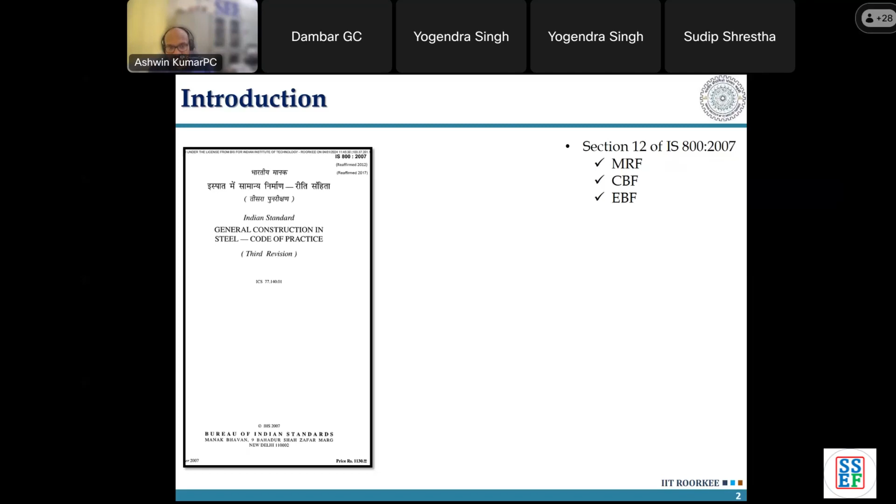In terms of IS 800, with respect to design of steel structures, you may already be aware that we have been using IS 800 2007 for a long time. In section 12 of IS 800 2007, there are 3 systems mentioned that we can use in steel structures: moment resisting frame, concentrically braced frames, and eccentrically braced frames. There is a new code released last year, IS 18168.

This code is titled Earthquake Resistant Design and Detailing of Steel Buildings, Code of Practice, which again includes SMRF, SCBF, and EBF. You might notice a small difference from section 12, wherein MRF includes ordinary moment resisting frame as well as special moment resisting frame. In IS 18168, the names are SMRF and SCBF, special moment resisting frame and special concentrically braced frames.

This means this particular code, released last year, was only focused upon high seismic zones, meaning these three structural systems, if used in high seismic regions, what codal guidelines need to be followed for the design of steel structures.

So my aim today is to make you understand the code clauses, how to design a particular structure, so that based on whatever information you have gained, you can do a vulnerability assessment, and if the performance is poor, go for a performance-based design. So the idea is to understand the current design guidelines for these three systems, SMRF, SCBF, and EBF, covering today the special moment resisting frames in totality.

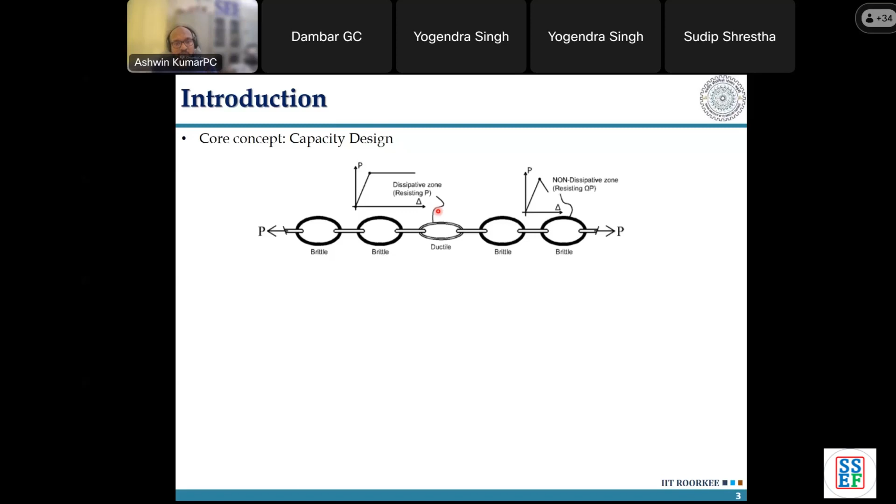The area under the nonlinear curve is what we call energy dissipation, needed during an earthquake. If you're looking at a moment frame, we need to identify which element should be more ductile and which can be less ductile and stronger, such that maximum energy dissipation happens in the beam. There must be a hierarchy in performance, so maximum energy dissipation happens in the member whose damage or fracture does not hamper the gravity load carrying capacity of the system.

So we have three systems: SMRF, SCBF, and EBF. In an SMRF system, we identify which is the ductile or weak member to go for. Rather than saying brittle, we call it the deformation controlled element, shown here, and the brittle element is called the force controlled element.

Now consider an inelastic deformation, or plastic hinges being formed, which means extreme fibers get yielded, and the yielding moves from the exterior fiber until the whole section is yielded, where the plastic hinge forms. Through that we want to dissipate energy, and that hinge has to have adequate ductility or rotational capacity to allow deformation in the member.

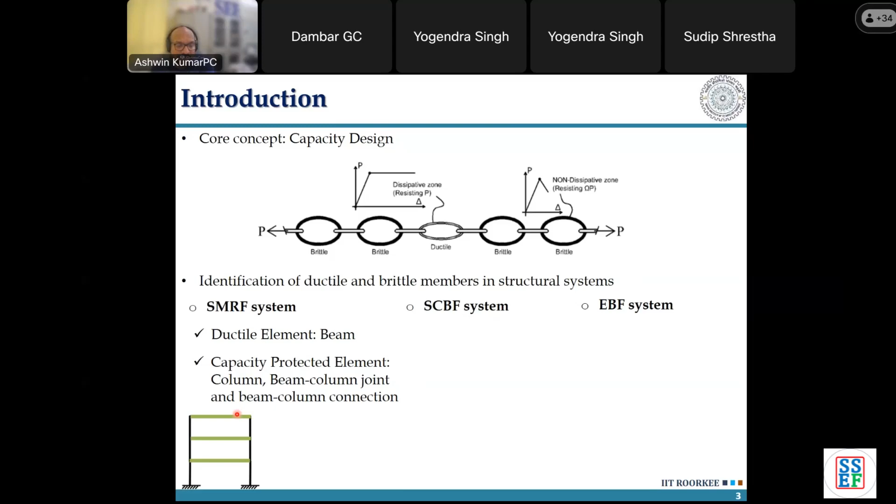You must have understood that if nonlinear hinges or yielding form in the column, it means the column will get damaged, which can lead to collapse of the member. Whereas localized plastic hinges at the beam are not as problematic, as we learned earlier.

In an SCBF system, which we'll learn next week, the ductile member or deformation controlled element is the braces, which undergo yielding and buckling under compression and yielding under tension, dissipating energy. Whereas the force controlled elements are the beams and columns.

It's like an electric fuse in your house - whenever voltage increases, the fuse element blows off, safeguarding all your electrical equipment. The same way, if the braces get damaged through yielding or buckling, they dissipate energy during the earthquake, safeguarding the beam column element.

So the deformation controlled element in the CBF system is the braces, and the beams and columns are the force controlled elements. Now, regarding eccentrically braced frames, this is intermediate to a moment frame and a braced frame, where you can see a slight eccentricity in the center line of the braces. There is a small link element, which we'll cover next week.

This link element is the energy dissipating element, meaning the brace, which was supposed to yield and buckle in a CBF system, is supposed to remain elastic throughout the performance of the EBF system. Instead, the whole energy dissipation, either through flexural hinges or shear hinges, is formed in this small location, termed the link element.

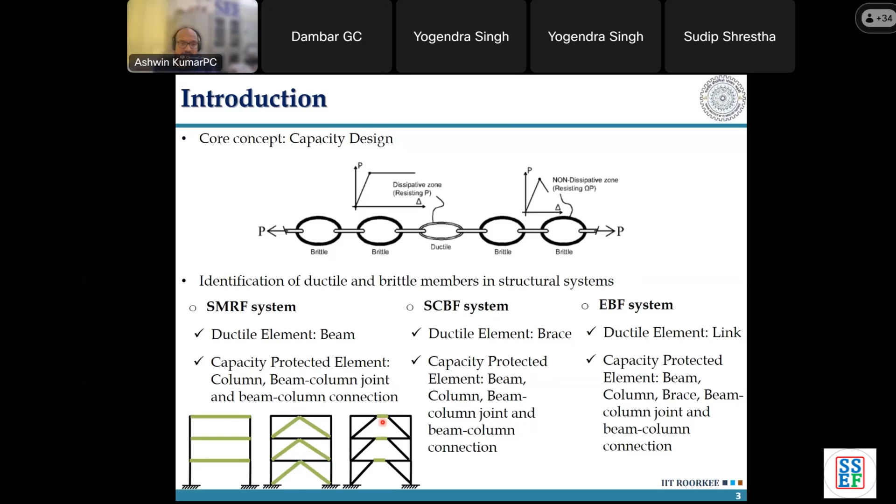Your design, whatever you are learning as per IS 800 2007 with respect to designing beams and columns as per limit state method, does not change. It is only a hierarchy that is being brought through the capacity based design method, through which we allow a certain duty to certain elements and give another duty to force controlled elements. That is the whole difference between what 18168 brings to the table.

Now, the first thing we have to understand with respect to 18168 is, if I start a design with respect to a moment resisting frame, CBF, or EBF system, what material grade should I select for the design? As per 18168, if you download that code, it crystal clear makes you understand that the sections, whether rolled steel sections or plates, can be of grades E250, 275, 300, and E350. Earlier I have a slide showing what the previous IS 800 used to give. So currently, as per the new code, you can use grades up to E350.

Another clause in the same code says that if any other steel is being used other than E250, 275, 300, or 350, you have to ensure that the nominal yield stress should not be greater than 350. So currently, the code in a high seismic region does not allow you to use more than 350 grade of steel.

The second thing is that any other class of steel, not per se of the grades mentioned above, if used, should have a minimum elongation of 22%, which means you do a coupon test as per IS 1608 or ASTM E8. You mark the gauge length location, and then once the fracture has happened, you measure the change in length to the original length of that gauge length location. That percentage elongation should be more than 22%.

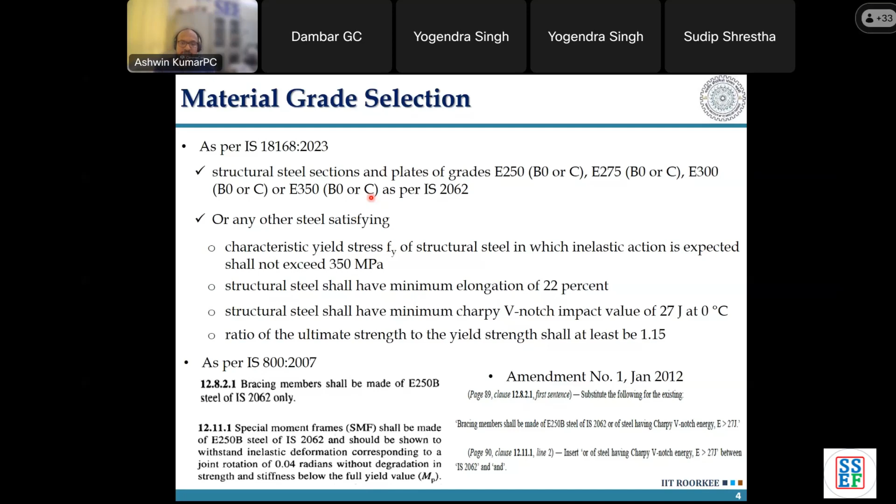So you can understand that E350, as I earlier said, IS 18168 is only for high seismic region. Whatever grade or structure mentioned for high seismic region can also be used in a low seismic region, because the demands in high seismic region are very high. The performance of these systems is much better than what is required for low seismic region classification. So you can use these grades there too. The big takeaway from this slide is that we can go up to E350.

Now this is a new entry into IS 18168. We understood that capacity design is the main heart and soul of IS 18168. If capacity design is there, we have to identify the weakest member, and based on the maximum force that the weakest member can transfer to the brittle or force controlled member, they should be designed accordingly. So IS 18168 has introduced a factor known as material uncertainty factor.

There are two factors given. One is Ry, which is the expected yield stress to the characteristic yield stress, which is what you test. Like if I give you a plate of E350 grade, 16 mm thickness, and tell you to do a coupon test to find the yield strength as well as the ultimate strength you are achieving.

So Ry is the value of the yield strength you get from the coupon test divided by the nominal value. If you use a nominal grade of 350 MPa and test it under coupon test, you believe 350 is the minimum yield strength mentioned by the code. So obviously the material would have a higher strength, let's say 400. When you test it, you get a yield strength of 400 MPa whereas the nominal value is 350 MPa. So 400 by 350 is the value of Ry.

Whereas Ru is the same ratio with respect to ultimate strength. So whatever expected value of ultimate strength divided by the nominal strength mentioned by the code for that particular grade. The relevance is very important here.

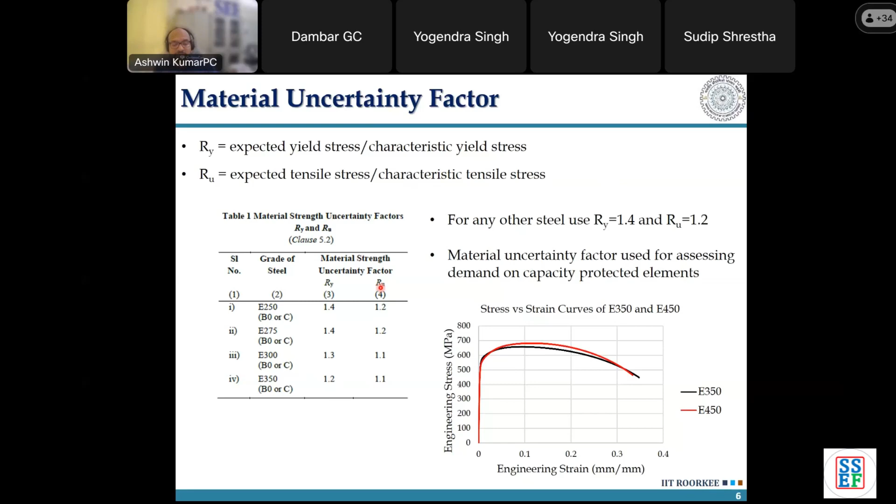So the catch here is, as soon as we go to high strength steel, ductility decreases, so other problems come in. That is why the code does not recommend anything beyond E350. But if you look only at the material uncertainty factor, E450, if it had enough ductility, would be an ideal choice, because the material does not have uncertainty over its yield strength or ultimate strength.

That is where capacity design comes in. So if you understand, let's say I have an E250 beam connected to an E250 column. The beam section might be different, the column section might be another section, and the heat input while manufacturing, or the rolling process or cooling process of these two beams, might be different.

Since this is an average value given in the code, you might find that the beam might have an RY value of 1.4 as per the code, but if you test a coupon, you might get 1.5 also. So there is a problem: if my RY value is not under control, or if I don't have a proper estimation of that particular RY value, rather than ending up with a strong column weak beam, I might end up with a weak column strong beam kind of situation.

So that is why this quantity, for the design purpose of creating a hierarchy between deformation control and force control, is important. It is also important to have total control as to when you give your orders to a manufacturer of steel. You have to ensure that, okay, you're giving me the average value given in the code, but kindly do some testing and give me a mill test report also. Let me do some testing at the lab also to ensure that 1.4 is a good number to go with or not. You understand the clarity now?

Just to summarize, the RY factor, or material uncertainty factor, is for designing the force controlled element only. It is not for the deformation controlled element. The deformation controlled element's maximum capacity we need in order to design the particular column element in a moment resisting frame, which is the force controlled element. So we have to apply this uncertainty factor while calculating that demand value from the beam so that I can design the column. That is the whole deal of the uncertainty factor.

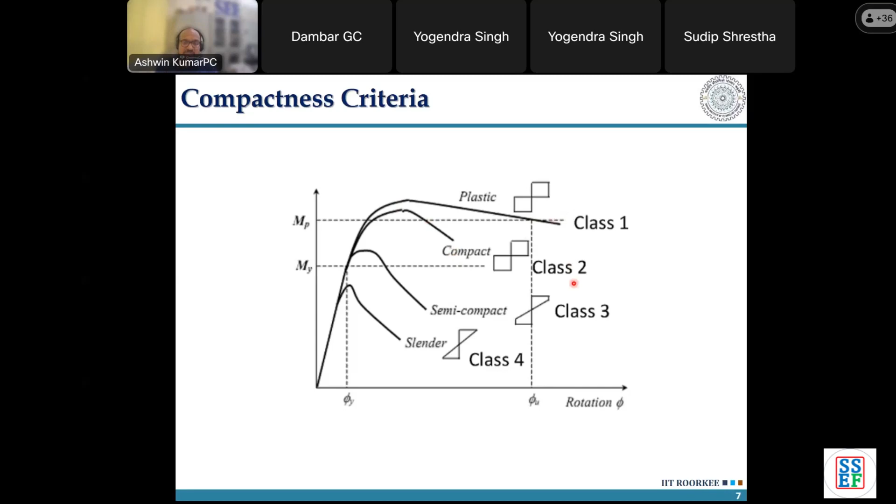But you have to understand that if you look closely at table 2 of IS 800 2007, the requirements given there for beams, columns, or built-up sections were largely for flexural members, like in a moment frame beam or column. Also, if you compare the values given there to international codes, you'll find that we were a little more relaxed about the requirement of plastic, semi-compact, or compact sections.

Just for everyone's information, if I have a beam where the flange satisfies the plastic condition but the web satisfies only the compact condition, then the section classification is compact. So if I want a plastic section in totality, then both my flanges and my web, in a beam or column, should be plastic in total. That is what is given here.

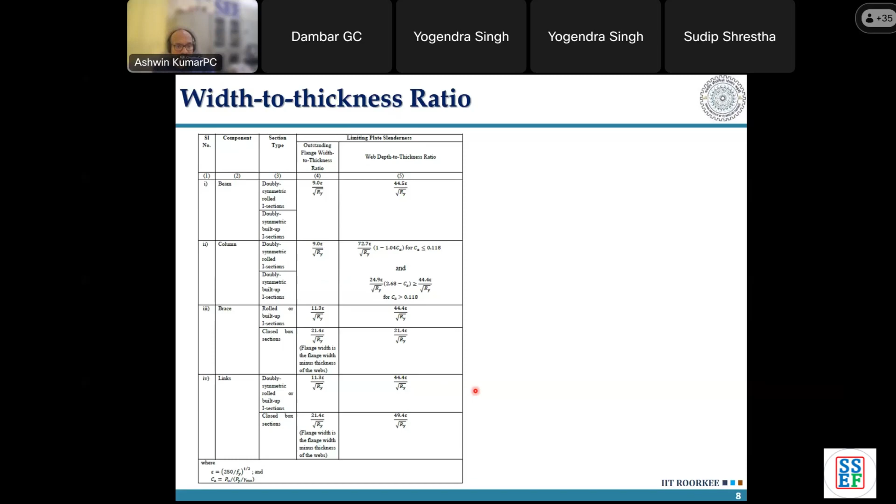As you call them, but in IS 800 or IS 18168 language, this is known as the continuity plate. We'll come to this part as to what continuity plates are - there is an entire story on this panel zone, etc.

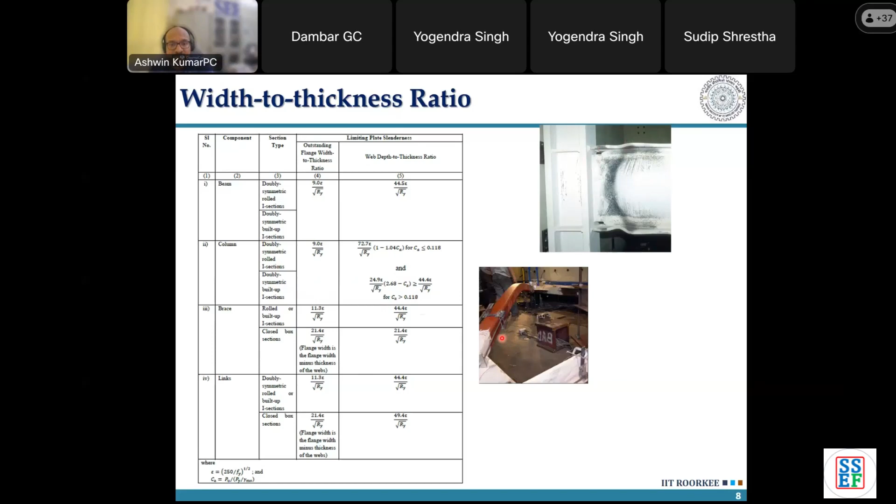You can see the phenomena of a brace frame here. The brace is buckling. Then local buckling occurs, and you can see a dip that forms in the brace when the nonlinear deformation increases. Then fracture initiation starts, and finally the fracture happens.

If you choose a brace section that is not so stout, like one with a large diameter and a very small thickness, that section, when it undergoes buckling or yielding, will undergo larger local deformation than a stout section. If a member undergoes global buckling, that's part and parcel of the life of a brace element in a concentrically braced frame. But if global buckling occurs along with a higher amount of local buckling in a brace, the brace fractures much earlier.

So when you have capacity protected elements like columns and deformation-controlled elements like beams and braces in a CBF system, you want them to have a longer life so that you can achieve ductile performance, with the weakest link having more ductility, and you don't want any premature fracture to happen. So apart from material selection, the compactness criteria has to be maintained to delay the onset of local buckling in the member.

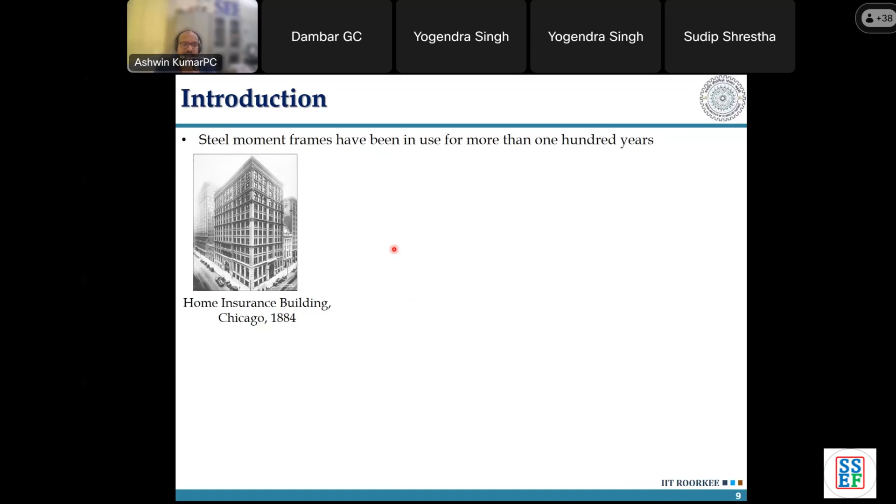You can understand that the Empire State Building, which you already know, was the first building where rolled I and H sections were used in the design.

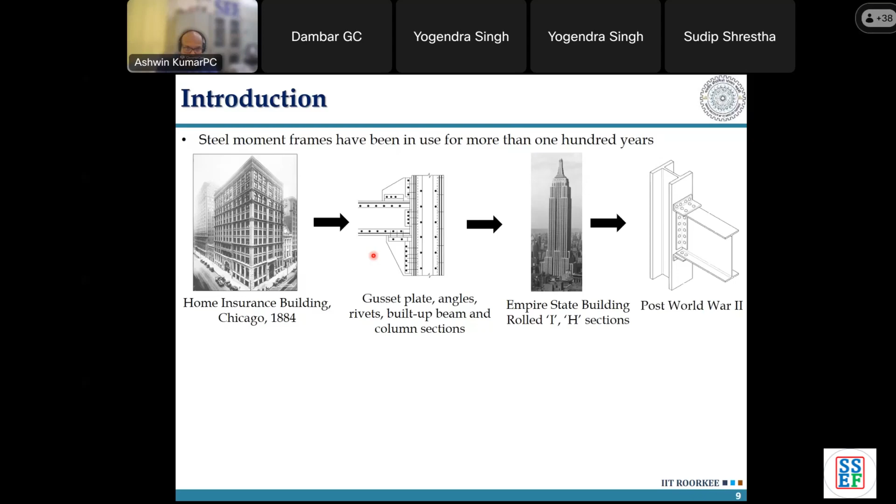Post World War II, for some reason, when they used all steel, they tried to optimize these connections into a more uniform one, which we normally see today. So you can see a 1970s welded flange, bolted web connection, which we normally see in India - when we look at beam column joints, we typically see this kind of connection where the webs are bolted and the flanges are welded.

Once again, you can see the continuity plates here, at these two locations. It's a stiffener.

So what does the property of the continuity plate do? If I have bending moment, earthquake, or gravity loads wherein this particular flange gives compression to the column flange here, if the column flange is of a larger width, it can undergo local buckling quickly. So to stiffen that particular flange of the column is why we give the continuity plate.

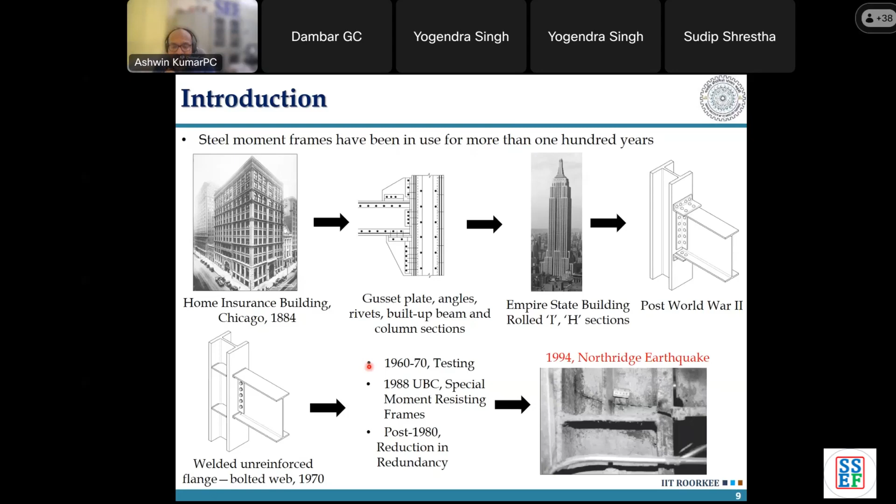You can see here a kind of typical damage observed in a steel structure in the 1994 Northridge earthquake. You have to understand that in this earthquake, none of the steel buildings collapsed, which shows how steel buildings are much superior to RCC buildings.

But to say nothing collapsed - there were certain locations of failure observed in the frame members. You can see the column flanges, the beam bottom flange shown there, the beam web, the continuity plate, and rather than a doubler plate, the shear panel in the panel zone has been stiffened using a vertical stiffener plate.

The same process - if I want to stiffen a panel zone, I can either give a doubler plate or give a stiffener, which divides the panel zone into two different areas, reducing its shear buckling length, correct? So you can see the column and beam here.

You can see the weld access hole, and you can see a crack emanating from the bottom of the weld flange directly across the column. So what happened at that time was they noticed a small thick plate below this - you have a weld access hole where people would give a complete joint penetration weld here.

So when they were doing the welding, they would give this backing plate so that the weld does not ooze out. But the earlier process was to keep this backing plate in place, thinking it would reinforce that joint area. Later on, it was understood that keeping the backing plate creates a deformity or flaw in the welded region, such that when earthquake or cyclic load is applied, this translates into a crack or failure in terms of functionality.

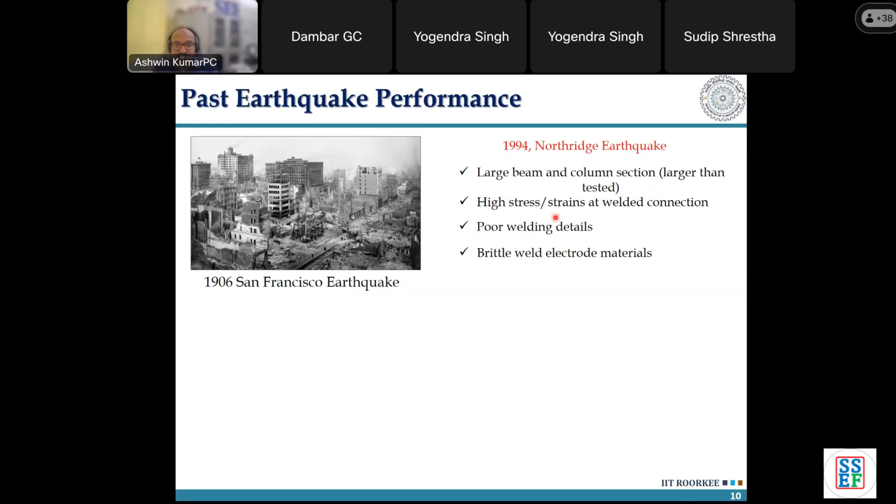And then the welding detail - you can see all the rest of the three details as to the reasons why failure happened during the 1994 Northridge earthquake was related to the welding being poor, or the conditions. Welding electrode material was not good, high stress-strain at the welded connection because of the backing plate that was there, and poor welding details were all the reasons.

But our requirement is that within the range of demand that the earthquake is going to give us - like normally if you open any FEMA code etc., it says under DBE level, the interstory drift ratio for a moment resisting frame should be below 2.5%, whereas under MCE level, the interstory drift ratio value should be less than 5%, because beyond 5% nobody can guarantee the efficiency of the connections. Beams and columns may be functional, they might not have fractured at all, but dependability on the connection reduces.

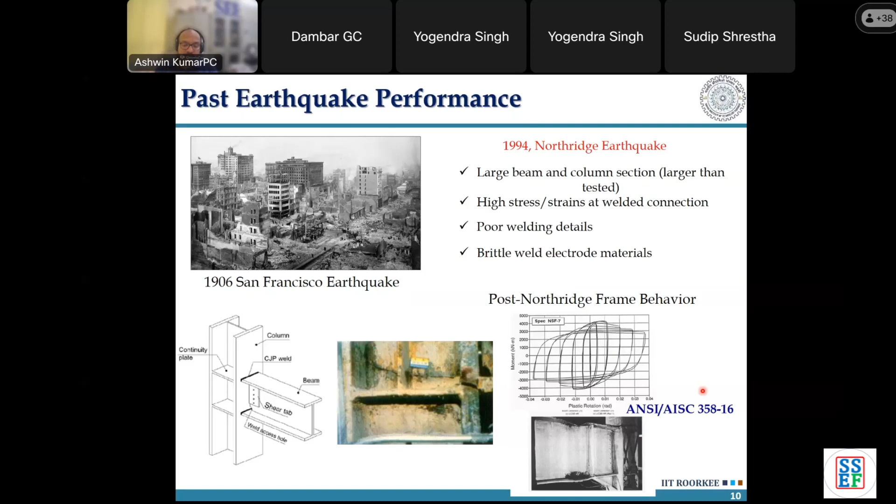So when you are testing your steel for their procedure, you have to understand, if you're using E350, your Ry value is 1.2, or if it is E250, it is 1.4. We have to take care about strong column, weak beam, not turning into a weak column, strong beam kind of condition.

So as a moment frame, what do you expect in a high seismic event? We are talking about performance-based design. We need to understand the ideal performance from the system. In a moment frame, if I get maximum hinge mechanism in the beams, then I'm dissipating more energy, which is ideal for my system. I can also be happy with plastic hinges, or yielding, at the bottom of the column. This is the ideal mechanism.

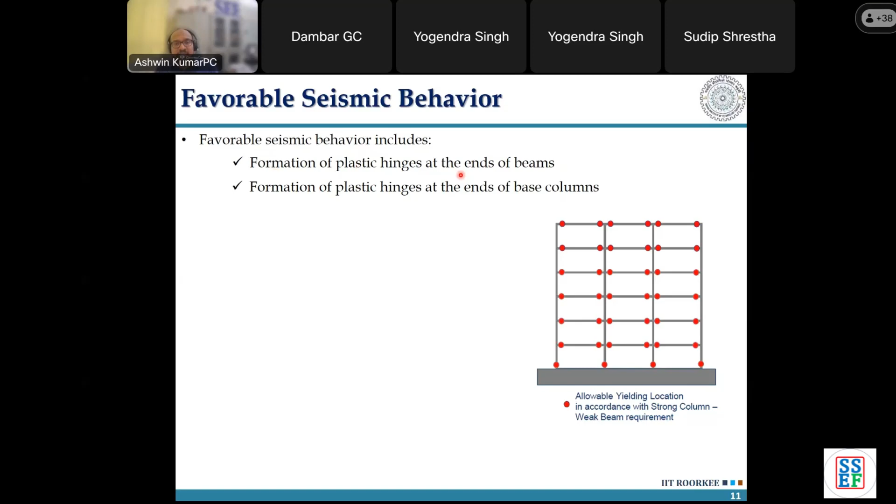If I go for only column hinges, or the column mechanism, rather than having many hinges, my hinges might be concentrated at a particular floor level, and the building can undergo collapse. So the ideal mechanism is formation of plastic hinges at the ends of the beams and formation of plastic hinges at the end of the base columns.

While this is happening, local buckling of beam and column flanges can occur. It is not unusual to find this kind of local buckling in a beam, and large deformation of the web can also happen when demand increases. This isn't under serviceability or DBE, but a condition when drift reaches a higher value, say an interstory drift ratio of 5%. Only then is such heavy deformation in flange expected.

Now, as I explained in the last slide, what is favorable behavior? Let's look at unfavorable seismic behavior. For a beam, excessive local buckling can result in strength loss and ultimate fracture associated with low cycle fatigue. You understand why I call it low cycle, or to be precise, ultra low cycle fatigue, because in an earthquake, only 10 to 20 cycles are enough to fracture the member under fatigue.

So what is the remedy if I have excessive local buckling? I have to choose a highly compact section as per Table 2 of IS 800. Also, lateral bracing, horizontal bracing given to beams or columns, is provided so that they have bracing to increase their capacity and reduce the sway action moment. So you have to give a highly compact section, not in the sense of Table 2's compact section case, but a section which achieves plastic moment capacity and has adequate rotation capacity, meaning a plastic section.

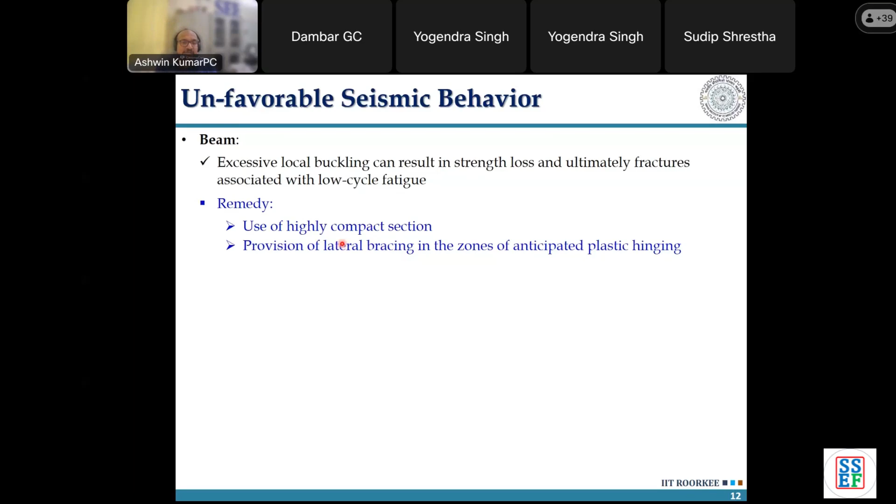Unfavorable behavior in terms of connections would be fracture in and around welds, fracture in highly strained base material, fracture at weld access hole, and net section fracture. Fracture in weld access hole is just the hole near the backing plate, which gives access for the welder to do CJP welding along the flanges. Sometimes people cut that hole to give easier access for welding the particular flange. Other issues are net section fracture of bolt holes, shear and tension failure of bolts, bolt bearing, and block shear failure. These are all names associated with connection failure.

And the remedy is to give pre-qualified connections. It's easy to understand what the remedy is there.

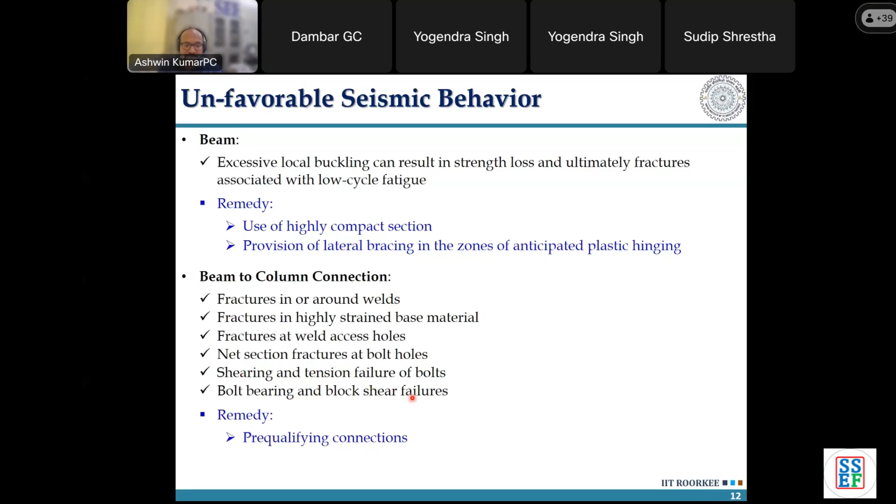In terms of joint panel zones, web compression buckling opposite the beam compression flange can happen, web shear buckling can happen, and fracture at weld in case of doubler plate connection. We will take up panel zones in a separate set of slides where I'll explain the current code requirements. But if such failure occurs, we have to meet the minimum shear strength requirement for the panel zone, and provide stiffener plates as a continuity plate, or give doubler plate requirements to increase the buckling capacity of the panel zone.

The stiffener plate, which is the continuity plate, is to give stiffening to the column flange in order that they do not undergo local buckling.

Controlling welding details is important, do not give higher heat input, because if you give higher heat input, it may reduce the yield strength and may produce residual stresses in the members.

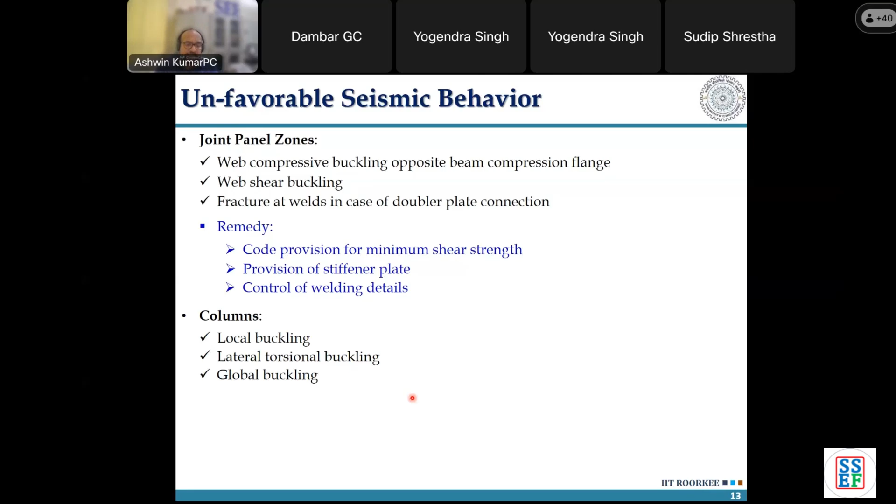In columns, local buckling can happen, meaning lateral torsional buckling, which you would have heard in a beam. In terms of columns, it is torsional buckling to be precise, and global buckling can also happen. The remedy is to give adequate axial strength, adequate compactness ratio, and lateral bracing has to be provided, as in the case of a beam.

Column splices are same as beam and column connection. For column bases, many things can happen: anchorage stretching or pull out, fracture in the base plate, fracture in column to base plate connection, and local and lateral torsion buckling at the plastic hinge. The remedy is column bases could be designed with a gusset plate or the base plate design, which we have to do perfectly.

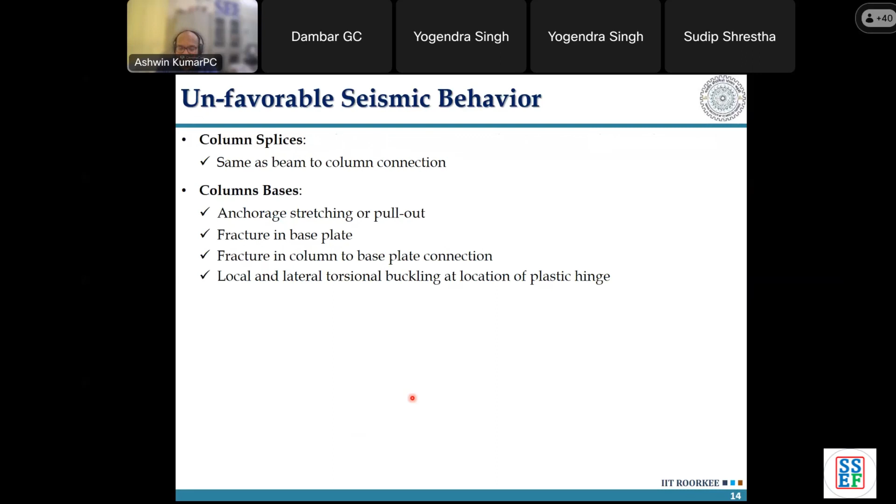Now, I don't know whether you can interact with me or not, maybe access might not be there, so I'll ask this question to you.

In terms of response reduction factor, for SMRF it is more than OMRF - will it translate into a low cost building? You understand that the response reduction factor for an SMRF would be very high compared to an OMRF. For SMRF it is 5, for OMRF it is 3. So will it translate into a low cost building or not?

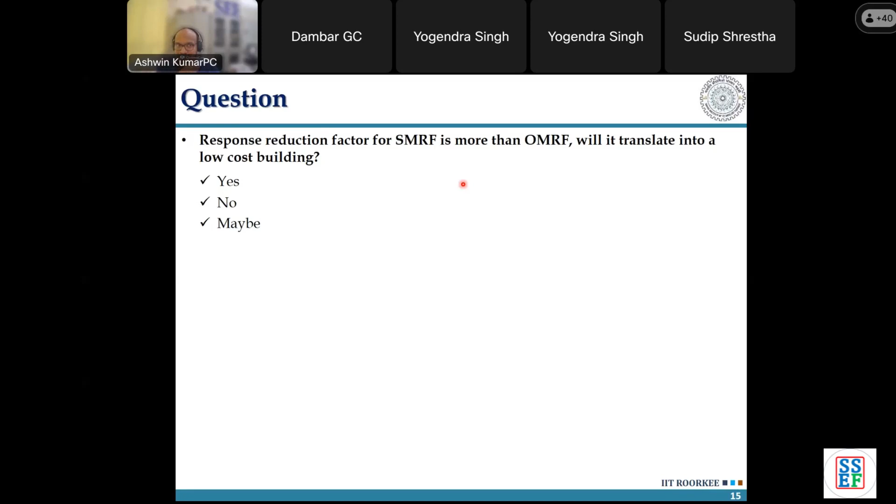You may say yes, no, maybe, but the answer is, in a moment resisting frame, normally the design is governed by the drift criteria, more than the strength criteria, because the stiffness is very low.

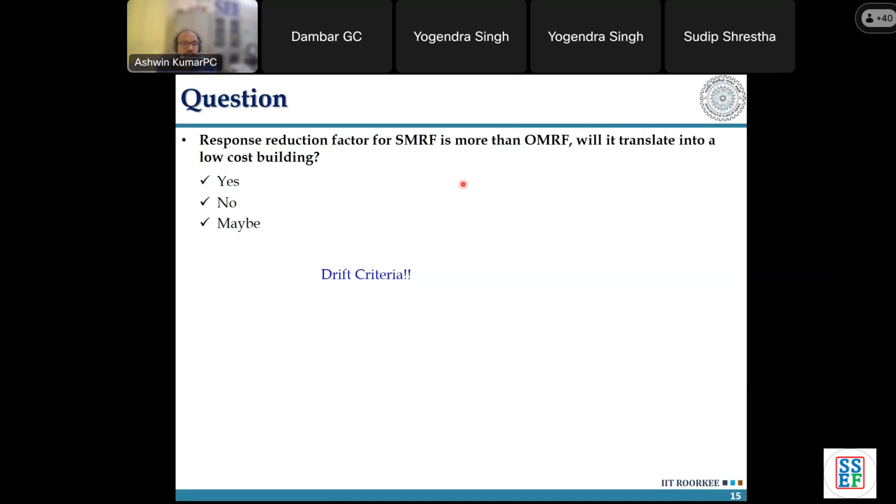You have beams and columns which provide this lateral stiffness to the member, and in comparison to a braced frame, you know that if you give braces in a diagonal fashion or in an X fashion, it is going to increase the stiffness of the structure. But you can understand that for an SMRF or an OMRF, drift would be the governing criteria in terms of your final design. So changing from SMRF to OMRF is not that important - the more important criteria would be the drift criteria.

With respect to design, what are the factors that may affect this, apart from the strength criteria? You may be using IS 800 or 1893 load combinations, like dead load plus live load plus earthquake load, where in most cases 1.5 dead load plus 1.5 live load plus 1.5 earthquake load might be governing your strength criteria. But as I mentioned, for a moment frame, it is the drift criteria that governs.

Other than that, since the drift is higher, P delta instability or second order effects might be there. Also, strong column, weak beam criteria applies.

Even if you have designed your beams and columns as per the demands that have come, the final section size selection would be based upon the strong column, weak beam criteria. So your section sizes are getting bumped up, I mean, they get increased.

Then there's the compactness limit - if it is in a high seismic region, you have to give a plastic section, so again your section sizes are going to increase to satisfy the compactness limit that is given in table 2 of IS 800. And then there are available sections.

The problem we have in India is that we have a certain code, like you must have heard about SP6, which gives the details of available sections for, let's say, angle sections, I sections, channel sections, etc. So with respect to that, you have a limited amount of sections.

So you might have always faced this issue that whenever there is a requirement for a beam and you check your section modulus requirement is so and so mm cube, and you want to select a section which is nearby to that, there is a big gap between what you want and what you have available. So that also adds up to the overall strength of the member that you're going to give.

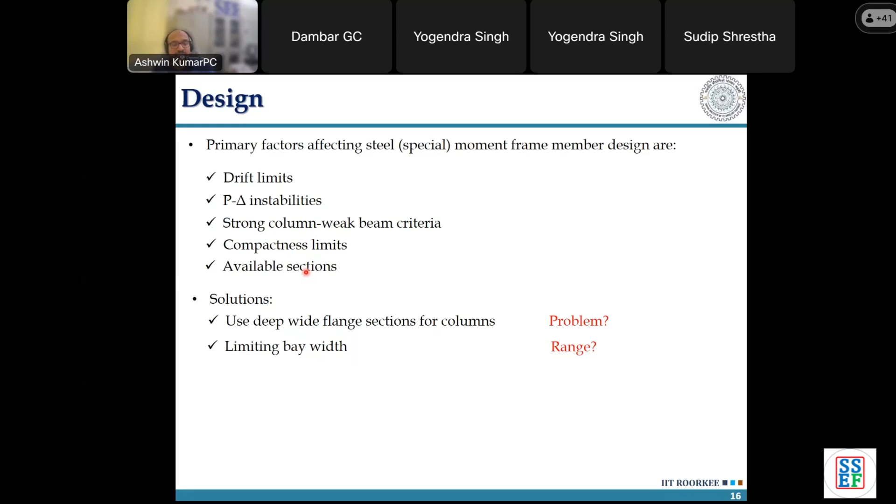A few tips: lighter, shallower sections and their connections that meet code compactness requirements tend to have larger inelastic deformation capacity than deep, heavy sections. So try to control your bay width so you don't end up with a deep section, rather go for a shallower section.

It's also desirable to distribute lateral resistance in an SMRF system to multiple bays rather than very few bays. The practice in America is to have a moment frame with multiple frames, like in RCC, to be moment resisting. But they only design the SMRF as the most peripheral moment frames, while the interior frames are only gravity resisting and made deformation compatible, but the onus of taking lateral forces is given only to the peripheral frames.

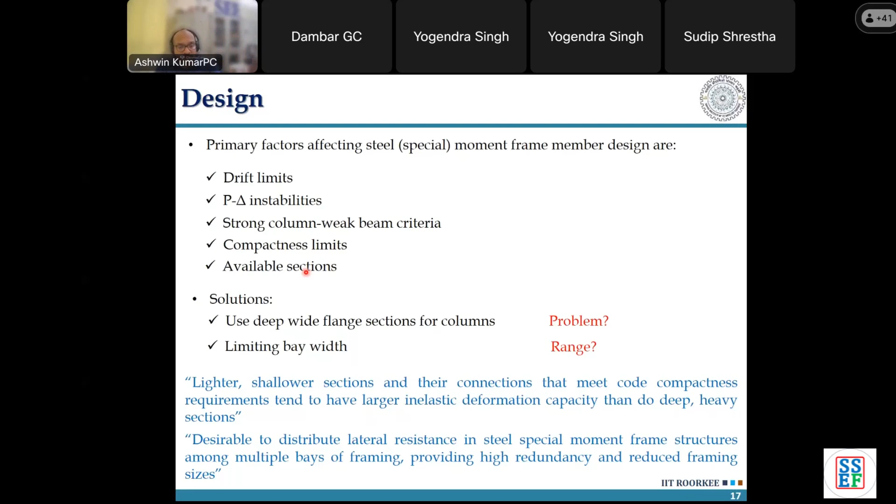This way they don't utilize interior frames as moment frames, reducing redundancy of the system. The advantage is understood - demands on beams and columns will be higher, section size demands much higher, but they have adequate sections with different thickness ranges and depths available, so they're okay with such an arrangement. Since we don't have the luxury of too many sections, it's better for us to use all frames in a particular direction as moment frames, which reduces section sizes and also gives redundancy in the system.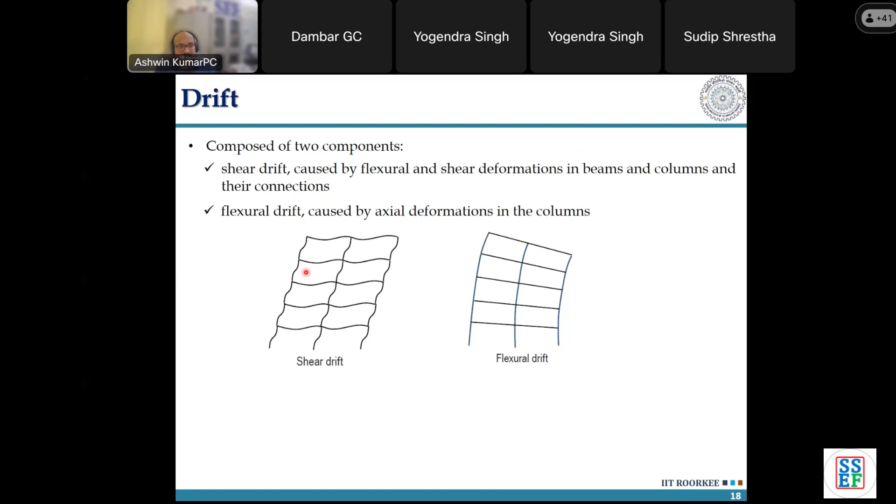Now, the next thing I want to talk about is that in a moment frame, it's the drift criteria which governs the overall performance of the system. Drift has two components: shear drift, caused by flexural and shear deformations in beams and columns, and flexural drift, caused by axial deformation of the column.

So if you have a slender frame or slender structure where drift is governed mainly by axial deformations in the column, and if you do an analysis and find your drift is going beyond limit, then rather than playing with the size of the beams to reduce the drift, playing with the size of the columns would help you counter the drift problem quicker and faster than aiming for the beam section.

But if your structure is a little bit stout, low rise, where shear deformation or shear drift is going to be more predominant, rather than attacking the columns in terms of increasing the column size, changing the beam size would be a better option.

Because what I want to say is if flexural drift is governing, if you keep on changing your beam size, it will have some effect on the overall drift performance, but that will indirectly cause you to increase your column size just to conform with strong column, weak beam.

So ideally, the big takeaway from this slide is what should be done if your drift criteria is getting exceeded. For a particular building, what to do, and for another type, shear drift type, what to do. That is the whole thing I wanted to explain here. That is what is written here also, that strong column weak beam criteria has to be satisfied.

So earlier, in a particular slide, we gave what is the ideal performance from a moment resisting frame, where we mentioned that I need plastic hinges or the yielding to happen in the beam ends, and I am happy with having it at the end of the columns also.

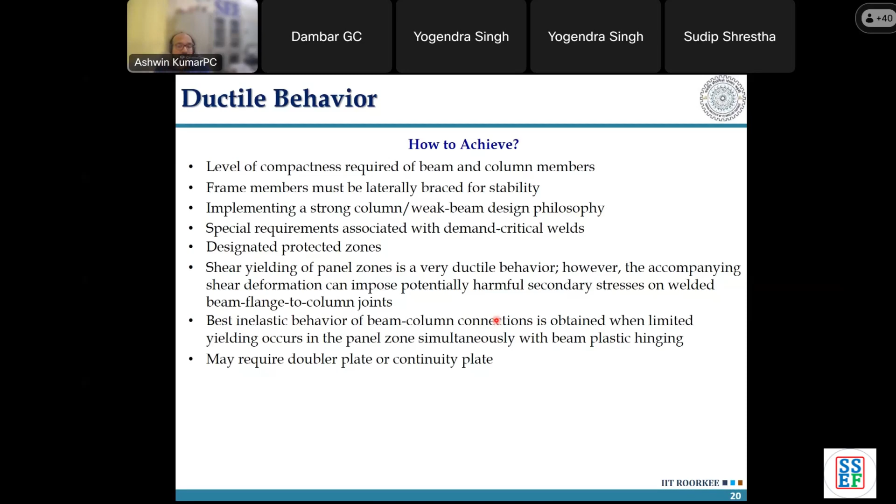So for this, you may need a doubler plate or continuity plate accordingly.

So when we say a moment frame is there, ideally a beam getting connected to a column is a moment frame. If you use ETABS or STAAD, you just give a frame element, a beam and a column, and automatically it considers a complete rigid joint between them.

But you have to understand that if the major axis of the column is where the beam is applying moment about the major axis of the column, then along that width you can give a rigid connection, a proper connection which is able to transmit the total moment capacity of the beam to the column.

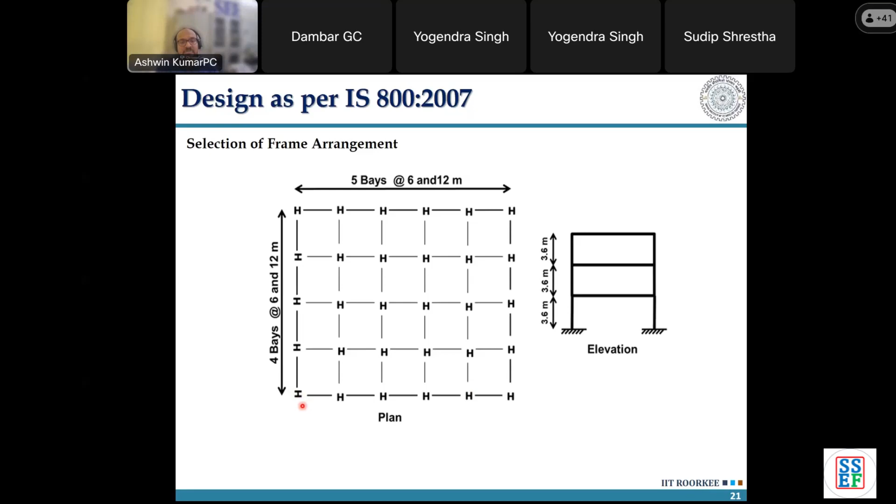This is very important, and the majority of the times when practitioners do this, I find that they don't see this particular fact that this performance can be different.

With respect to IS 800 2007, this is the old way of defining a special moment frame. It says a special moment frame should be made with E250B, and should be shown to withstand inelastic deformation corresponding to a joint rotation of 0.04 radians without any degradation in strength and stiffness below. So it is telling certain strength has to be achieved, but the rotation the connection or beam joint has to achieve should be 0.04 radians, similar to 4% interstory drift, but without any degradation happening in the overall system - there should not be any drop in the hysteresis curve or backbone curve.

Now if you look at the new code IS 18168, which is for high seismic regions, if you read it carefully - why I am reading this particular code with you is for a particular reason. You can see here, special moment resisting frames designed according to these provisions are expected to provide significant inelastic deformation capacity through flexural yielding of the beam, and limited yielding of the panel zones.

It says it is okay to have limited yielding in the panel zone, little or no yielding of the columns except at the base. So it is defining a boundary that okay, you are my deformation controlled element and you are my force controlled element, the column being the force controlled element.

Special moment frames may be used in any seismic region except for buildings taller than 15 meters in seismic zone 4 and 5, which I talked about in the beginning, because beyond 15 meters the drift criteria solidly kind of governs your total design, and it does not give enough energy dissipation. So leave it out in terms of heights more than 15 meters.

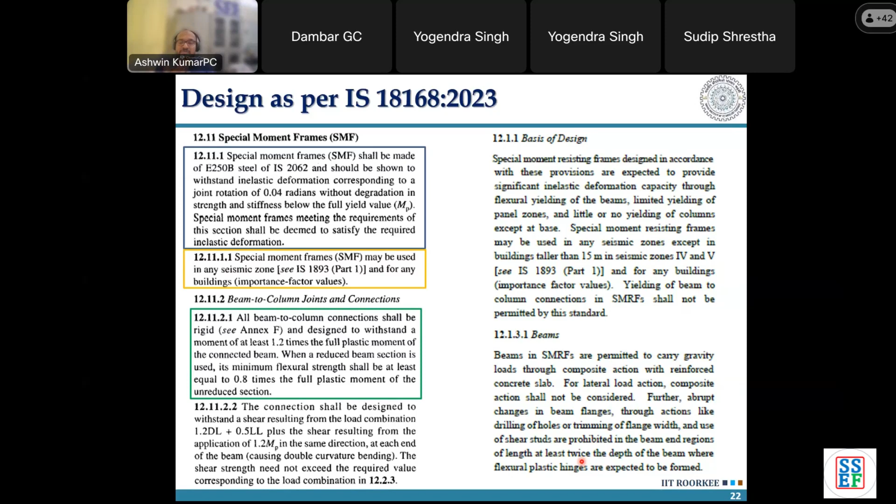In RCC, there's no such provision, so when you consider strong column weak beam, you have to consider the composite action of the slab, otherwise you end up with a strong beam weak column kind of concept. That kind of problem is not there for steel structures.

The next point is about the column connection, which shall be capable of accommodating a story drift of 0.04 radians without loss of strength exceeding 20% of the beam plastic moment capacity. So it doesn't say there should be zero loss, it says 20% loss is acceptable.

Now the protected zone, as mentioned earlier with the 2D region from the last clause, the region where plastic hinges can form at the end of the beam, equal to twice the depth of the beam, subjected to inelastic straining, shall be designated as the protected zone. Steel headed stud anchors and other fabrication and erection attachments shall not be placed on the beam flanges within the protected zone.

Now, another important aspect regarding beam sections. Earlier in SP6, you had tapered I sections available, like ISMB 600, ISMB 400, ISWB sections, all tapered flange sections where the flange tapers towards the flange tip. But in this code, it clearly mentions that only doubly symmetric parallel flange standard rolled sections as per IS 808, or built-up sections, would be used. So it does not allow tapered sections, only parallel flange sections need to be used.

So where do you look besides IS 808? IS 12778 is the equivalent of SP6 for parallel flange sections, you can get your section size from there. So for beams and columns, you have to use parallel flange sections in totality.

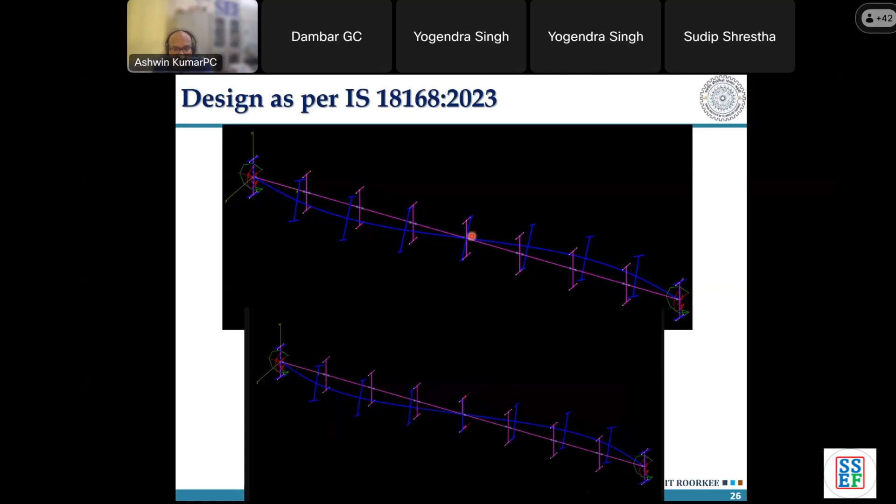You can see this particular area is getting highlighted at this location. There is a twist that happens, right? Due to lateral load or due to gravity load, there can be a condition wherein your beam undergoes a particular twist, wherein if you give only a lateral support to the middle of the beam section, that is not enough. It will still rotate.

If I give a support, what you can see as a red color arrow here is a lateral support given at the CG of the I section, but that didn't avoid the rotation - the blue color is still happening. But if you provide lateral support to the top and bottom flanges of the sections by any means, then it will avoid the rotation of the section.

So this is the whole idea of giving horizontal bracing to the member. Just giving any section at the CG of the I section will not do. You have to understand the mechanics behind how it is rotating and then what to restrain.

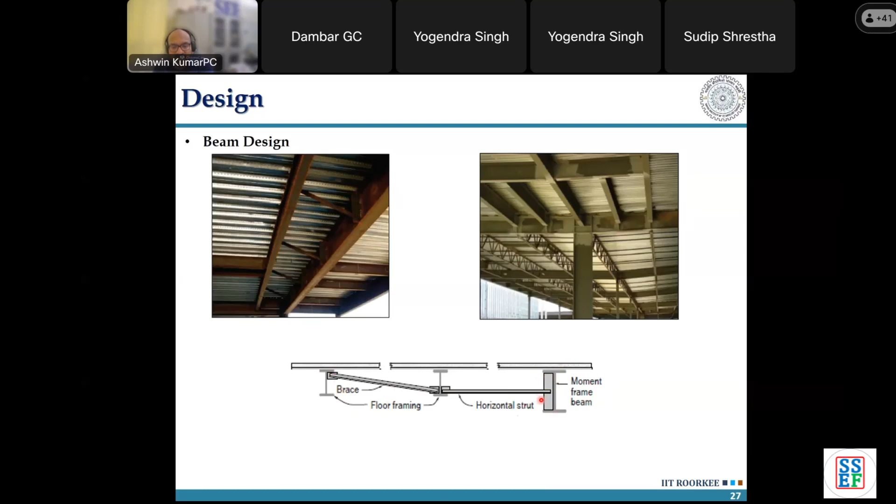So if you have to restrain a particular beam against lateral torsion, then you have to give support at the appropriate location as per the deformed shape of the member. That is what this particular bracing thing talks about.

Now, with respect to splices, you understand that when we buy a beam section, a built-up plate - if you buy a plate for a built-up section or a rolled steel section, it does not come in infinite length. Either it comes in 6-meter length or a 12-meter length as per the manufacturer's production line.

And so, where should we provide a splice is what is given here. If you are giving a splice in a beam section, it should be located at least 3d_b from the face of the column, or d_b from the line of action of any concentrated force.

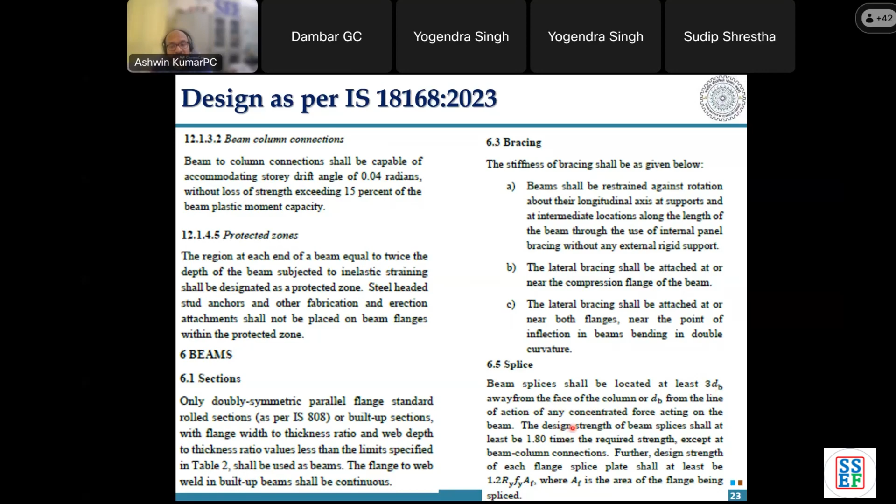Now you can see for column, you can read here that column splices shall be located in the middle third height of the column, at least 1 meter away from the beam to column moment connection.

false ceiling. So such kind of a demand, when you look at in terms of what the code wants - you understand why the code says between middle third, right? You can understand why the code says middle third.

The only thing is you have to plot the bending moment diagram in a column when considering lateral loads and gravity loads, and you will understand why it says middle third is the more prominent location. It also gives you how much strength it has to be designed for. So such mistakes need to be avoided.

As an engineer, as a designer, if you are going for a performance-based design, before you do the performance-based design, to get to the correct kind of behavior, you have to design it properly, right?

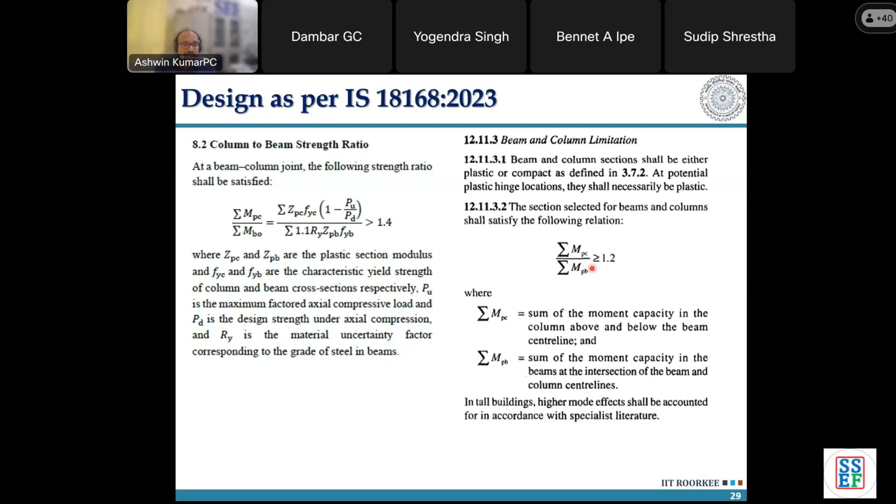There may be many steel structures out there for which retrofitting would have to be done, in terms of improving design or some kind of retrofitting. But for the rest of you who are designing a new building, this has to be countered, right?

Now here I have kept a question just to cut the monotony, just to relax you a bit: what should happen if I increase my grade of steel today, say from 250 to 450, would it do any good?

So the answer is, if I increase the grade from E250 to E450, you might say, okay, my section size will get reduced. But if my section size gets reduced, there are many other problems that may come along with it. Drift may increase, the fatigue strength may decrease. So it is not a direct relation that going from 250 to 450 will simply reduce your section size and the consumption of steel, and bring down the cost of your building.

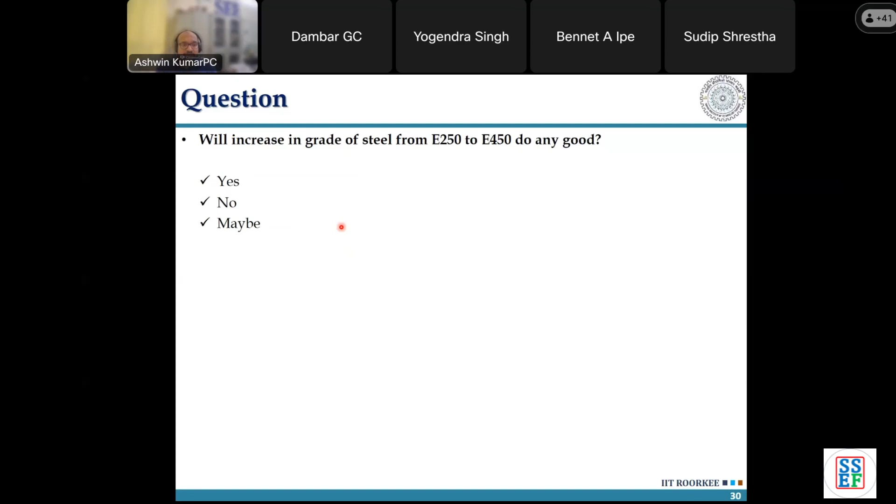Sometimes when drift is the criterion that governs your structure, the grade of steel may not matter. If fatigue is the criterion, like in a bridge, you have to check which elements are going to help you. If that particular thing is not governing, and strength is governing, then well and good, you can go ahead with this.

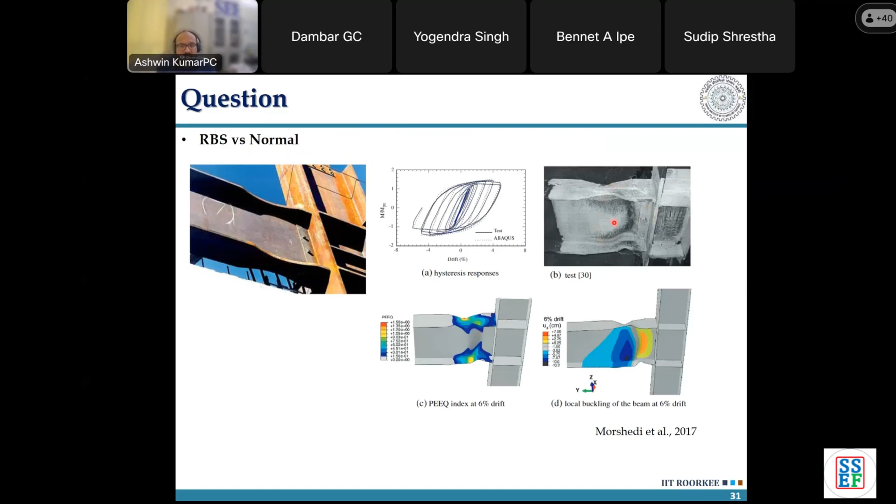If the plastic hinge had formed at the face of the column, the demand in the welds would have been much higher. But if you ensure that it happens here, then well and good, the performance is much better, right? Now, coming to this handbook, you would have seen, right?

SP6 1964, you would have had an idea wherein you get the section size for ISMB rolled carbon steel sections, channel sections, angles, I sections, etc. I don't know how many of you know about this particular code, IS 12778, which gives you the section sizes to be used as per IS 18168, which is for parallel flange sections.

Now, any day, if you're connecting, normally what you do is bolt in your flanges. If you're doing connections in the flanges etc., parallel flange behavior is much better than a tapered flange, obviously due to the reason that the cross section is decreasing.

If you look at SP6, the thickness of the flange is actually not located at the tip, not at the joint of the web area. It is some average location in between.

But when you look at this particular parallel flange code, if the thickness T is 12 mm, it is uniformly 12 mm. So whatever calculation you do for edge distance, shear failure, bolt block shear failure, or net section failure, the thickness you would use in calculation would be exactly that value. So in that way, parallel flange sections are much better than tapered sections.

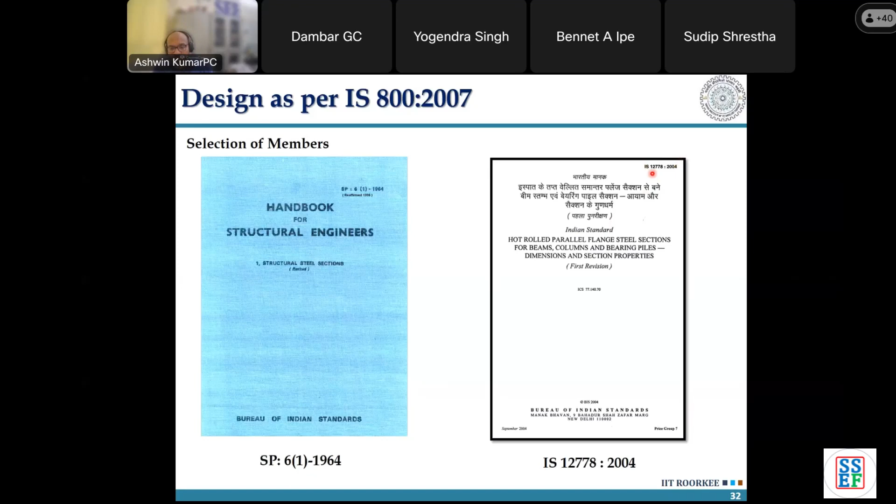Now, if the question comes in as to what is the maximum depth of rolled sections available in India, and if your answer is 600 mm, then you're wrong. The maximum section is 900 mm, as per code 12778. If you check this particular code, it has been there since 2004 itself. Many don't know this; I'm assuming some of you know and some may not.

This code has long been there with respect to parallel flange sections, and the maximum section available is 900 mm. But as per IS 800:2007, which is a more relaxed code in terms of classifying section capacity, the number of sections in SP6 was 65 - this is only I-sections I'm mentioning. In 12778, you have a larger pool of parallel flange I-sections available. But the number of plastic sections, as per table 2 of IS 800 classification, is only 28.

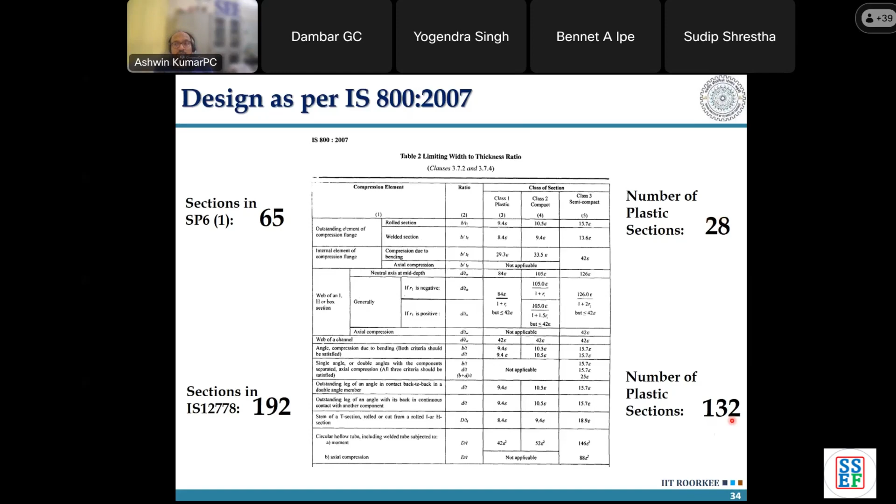And as per this, it's 132. So anyone using SP6 earlier, if they designed a particular section and found a section modulus for a beam, would have had to use a higher section just to satisfy the design, because none of the sections would have classified as plastic section. They don't have enough pool on the right side to get selected. Same goes for this: you have a larger pool now from 132 sections, but how many are enough? Once you design, only then you'll understand.

One more thing is that since they have many sections in this 400 range, architects don't have to worry about the structural engineer finding a section of a particular size. What they do is make a box of 450 by 450 at the location of columns. They know the structural engineer would find enough sections in that depth so he doesn't have to worry later. In India, we normally go to an architect and say, sir, 600 is not working, I need a higher column of 800 or 1 meter. The architect says no, it hinders my architectural plans. Then you go for built-up sections, etc.

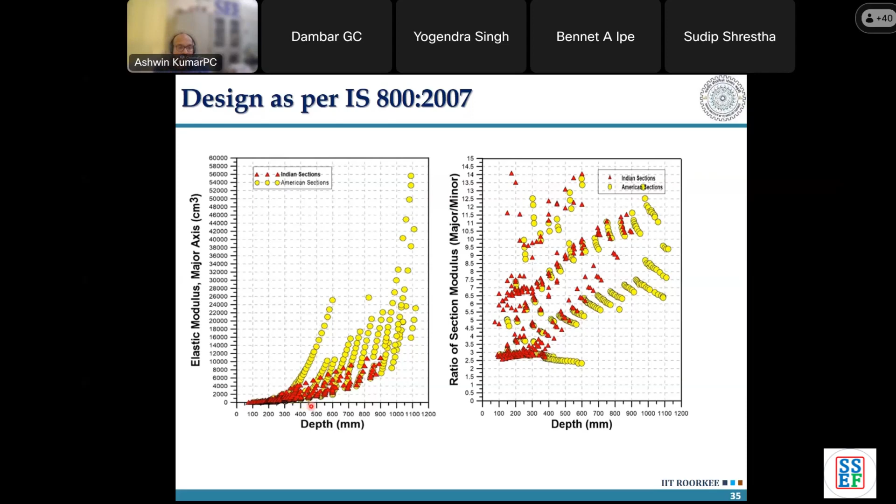So that kind of problem is avoided if we have enough sections also in our design. Okay, so this you can go through - this I have, once Tajul shares the slides with you.

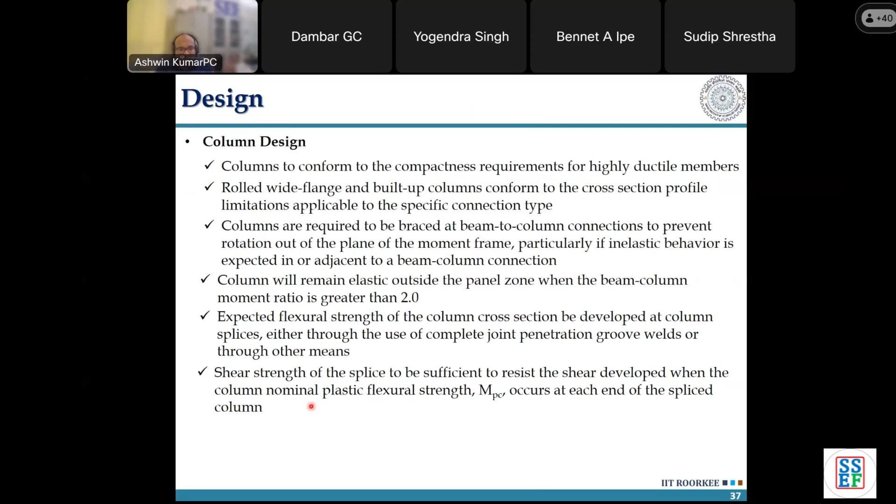This is like how to go with respect to beam design - beams need to conform to compactness criteria. I mean, what all criteria should be thought about for the design of beams - I've included it here. For column design, what all - it's like compactness criteria with respect to what should be achieved. Then lateral bracing should be provided. That kind of criteria is given here regarding splice also.

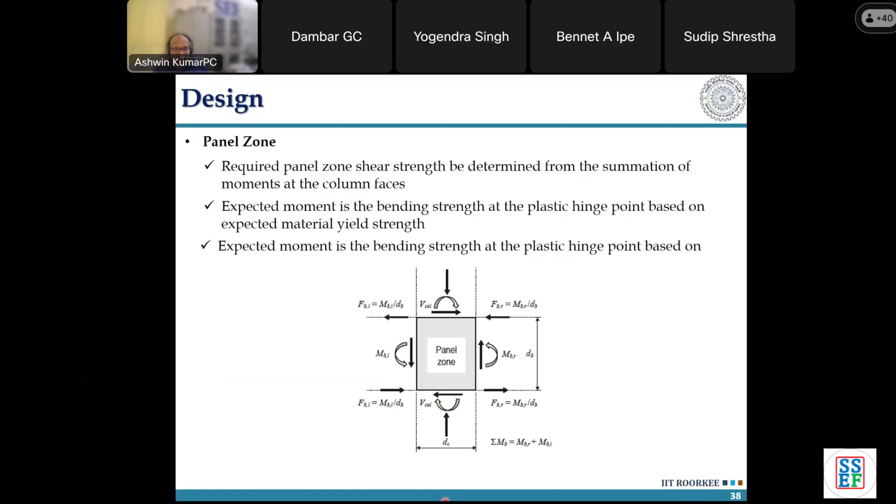Now here is the main thing we want to talk about. We already know - you might have already got experience designing a beam, you might have already designed a column in your undergrad or master's program. But panel zone is a very tricky thing. Now you can understand you have a beam on the left, and a column there, and a column at the bottom. If I look at a particular joint in a particular frame, you can understand this is a bending moment diagram variation, and I have a huge spike in shear force at that particular region. So it's the rate of change of moment that happens in that small area, that small panel zone, which might be a very small width of, let's say, 300 by 400 or 500.

The shear forces are so high that shear behavior dominates in the panel zone. So the panel zone element is governed by yielding in shear. If the panel zone is very thin without any doubler plate, it may undergo shear buckling, buckling due to shear forces. That is why people check the thickness of the panel zone. If it is not adequate, they provide a doubler plate to increase the shear buckling capacity.

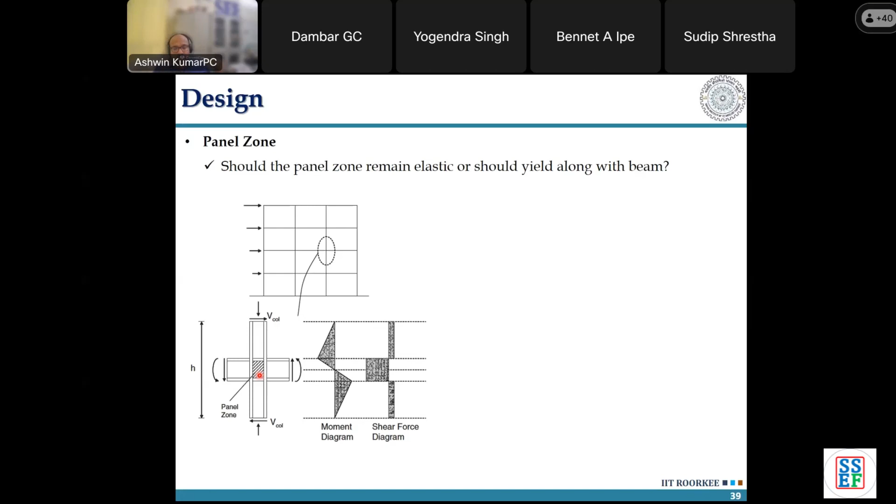Earlier, if you take the case of the US, what they used to do was design it to achieve strong column weak beam. They wanted their panel zone to remain entirely elastic throughout the behavior of the moment frame, whether the beam is undergoing nonlinear plasticity or anything else.

They didn't want their panel zone to go into the inelastic region. But later, around the 1980s, and then in 1988, Krawinkler came up with the nonlinear behavior concept. They understood that the panel zone has a ductile behavior in shear, and they could depend upon it for yielding and energy dissipation, having two elements work synchronously to reduce each other's burden. Like if the beam alone were dissipating energy, it would fail earlier.

So if the panel zone is also yielding along with the beam, with limited yielding, it shares the energy dissipation and relieves some pressure from the beam. It's like a combined effect in resisting a particular force. They found this was good if it could be achieved. They understood, and this still stands today, that panel zone yielding and beam yielding should have a hierarchy: beam yielding should occur first, panel zone yielding second. If that happens, the frame dissipates enough energy without nonlinear deformation exceeding any limit, and it has adequate rotational capacity. Everything works well.

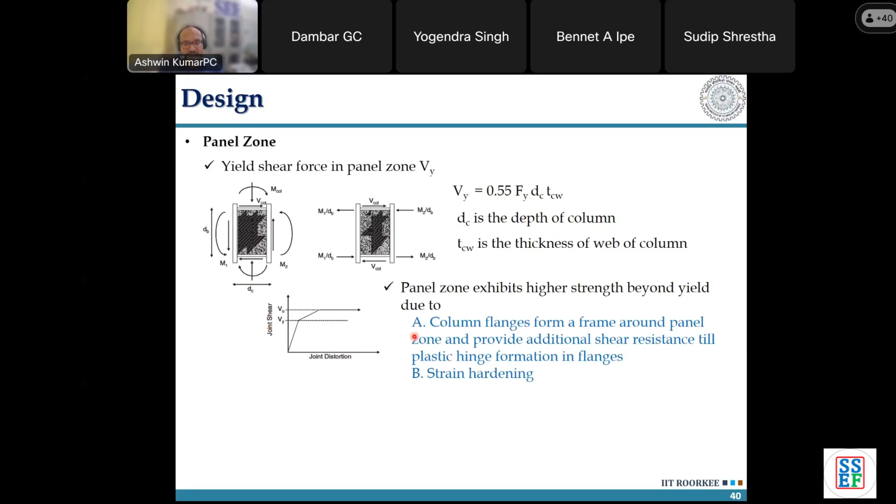Krawinkler thought this might be a better way to understand this particular thing, as to have a limited yielding in this thing, where they went into this particular formula. Apart from what they found is, once it yielded, it had additional capacity. Now, where this additional capacity was coming from was the plastic hinging in the column flanges at these four locations. If you look at Eurocode, you might be able to understand those equations much better.

But later on, as I said, this is from 1988. After that, when the real code came in, after the 1994 Northridge earthquake, they found out that this was not enough in order to control. So where does our code stand right now? If you remember what RY, FY, ZPB was there, you can think of it.

18168 is telling us how to calculate the panel zone demand, that is finding out the bending moment at the face of the column. Fy into Zp is the flexural capacity, plastic moment capacity of the beam, including the uncertainty factor and the strain hardening factor, as this is the peak value that the beam might transfer. This is 0.95 db to find out, it's like moment divided by the lever arm, to find out what is the shear demand at the face of the column near the panel zone.

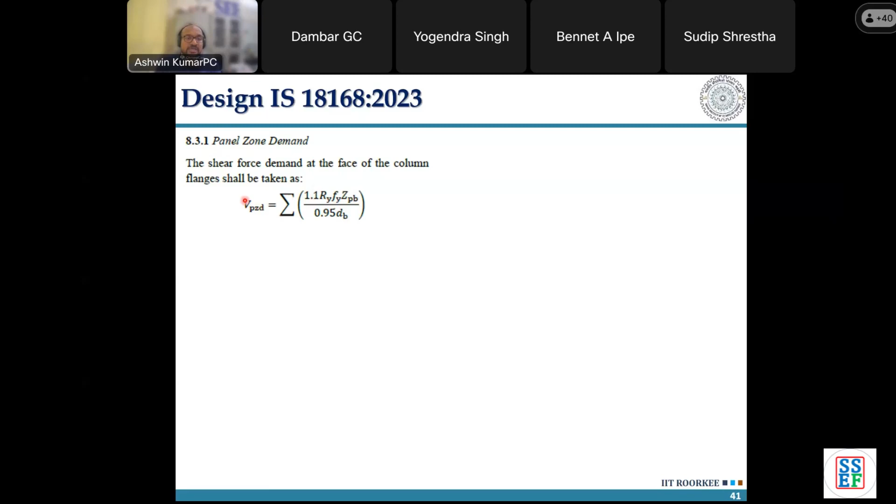And how do you find out the panel zone capacity? It gives this particular formula with the partial safety factor of 1.1 given there. Rest, the idea remains the same. 0.95 divided by root 3 comes up to 0.56 or something. In American code, it's 0.6. Rest, whatever is there in 18168 is these two clauses.

One is to avoid the buckling, it's a check of shear buckling. There should be a certain thickness of the panel zone. If the thickness is not enough, provide a doubler plate. And this is the requirement for the continuity plate to avoid the local buckling of the flanges of the column.

So if you look at these four formulas and look at what the Eurocode and American code are currently giving, even American code, if the axial load ratio is less, they use this particular formula with a 0.6 here. If the axial ratio is more, they use this other formula. So they are still not left out. In this particular case, where Indian researchers can also look at it, the world is also confused on this particular matter.

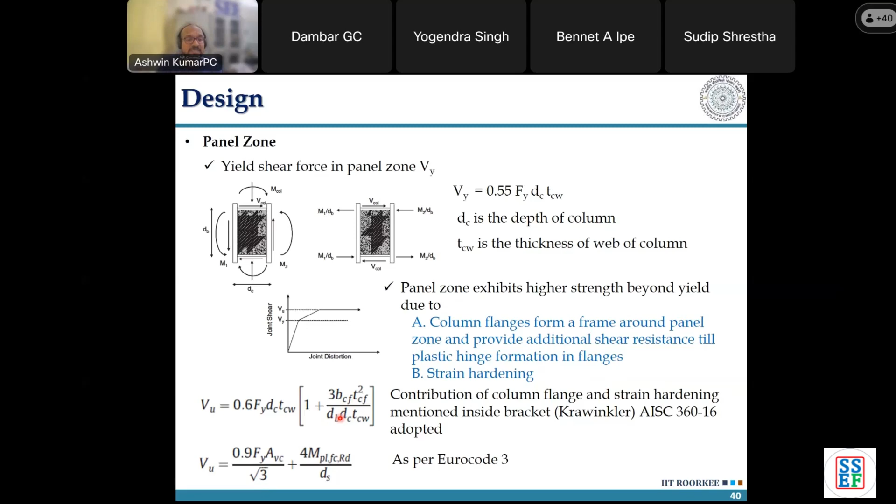One thing that is certain is, yes, panel zone yielding along with beam yielding, with the beam yielding initiating first, is the most ideal behavior for energy dissipation. But how much amount of yielding? Everyone says limited yielding of the panel zone is enough, but nobody quantifies how to limit that particular value. Even our code currently does not talk about that extra strength, because the strength of the panel zone can go beyond this.

But it does not say that, it keeps it as is, meaning with strong column, weak beam and everything coming into picture, maybe - and I'm using the term maybe - we are doing a strict design of elastic panel zone design, rather than, if you remember the first clause that I read in IS 18168, our intention is to have yielding in the beams and limited yielding in the panel zone. But the intention and the clauses do not match.

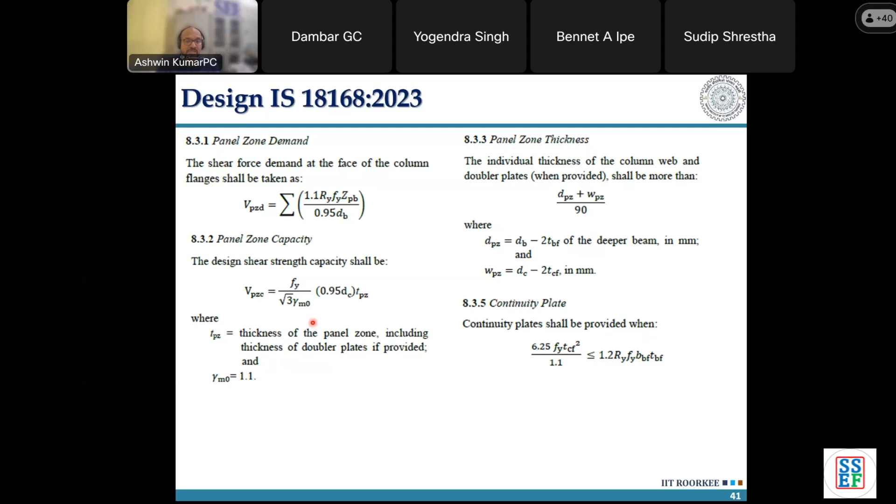So as an Indian researcher or Indian designer, you can go ahead with this particular approach. This is much better in terms of, rather than depending upon the extra strength of the material, pushing the panel zone into more non-linearity, and then having no control over how to control the kink or the failure or fracture. This method is still fine. But yes, the beam will be overstressed in this particular case. How much, has to be assessed by academicians and researchers, right?

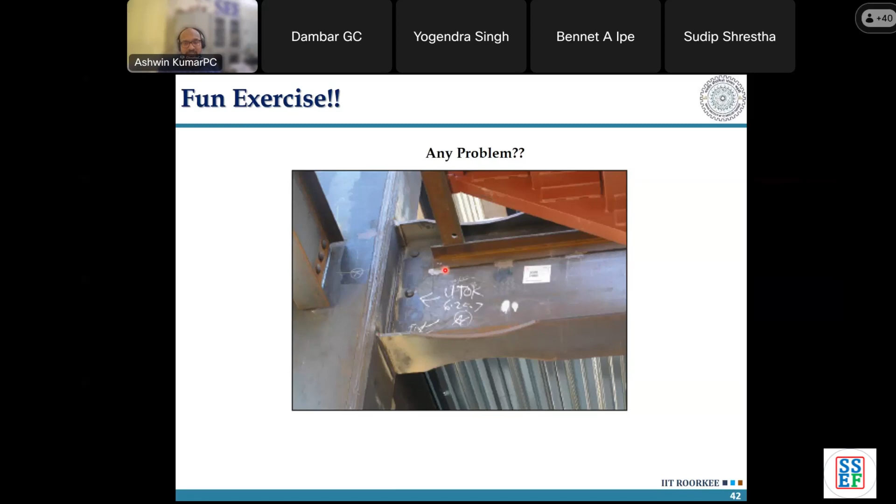So you have to understand one by one as to what we were explaining till now.

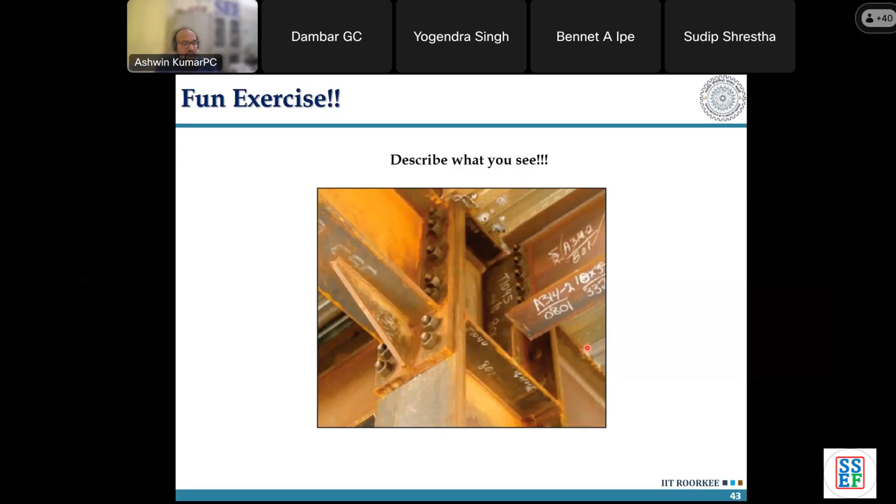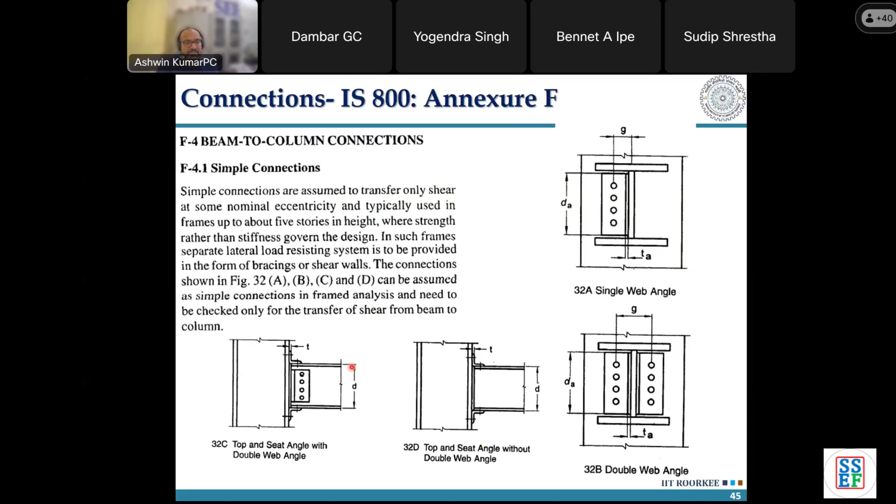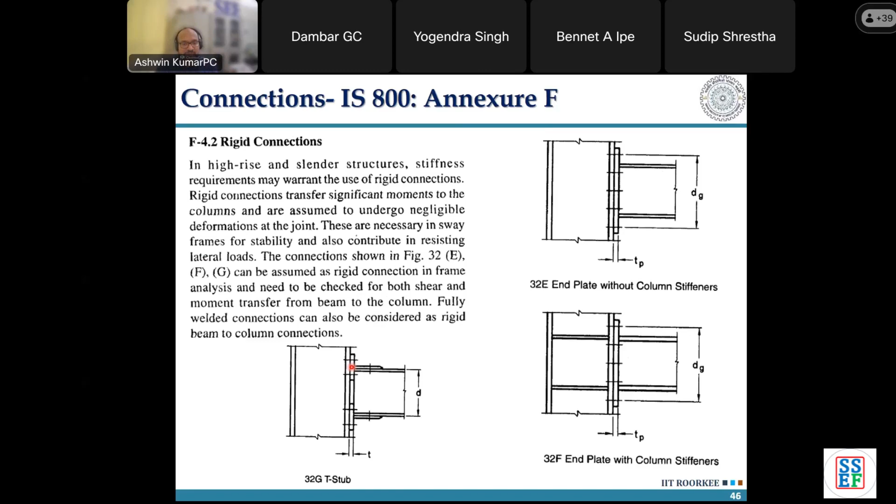Now here is one more problem with our Indian code that I want everyone to notice. As I said, AISC 358 is a code Americans developed for pre-qualified connections. In Indian code, Annexure F gives a classification, a drawing, of what is classified as a simple connection and what is considered a rigid connection. But we don't have a set procedure for, say, joining E250 to E250, or E350 to E350, or any other connection. I don't have a proper procedure in hand for doing the connection itself.

The only thing given is how to classify a connection. If you look at clause F4.3, based on this diagram, the clause relates rigid connection as Mu by Mpb, where Mpb is the plastic moment capacity of the beam section. So whatever moment is transferred relative to the total plastic moment capacity, if it is more than 70% in strength, it's called a rigid connection.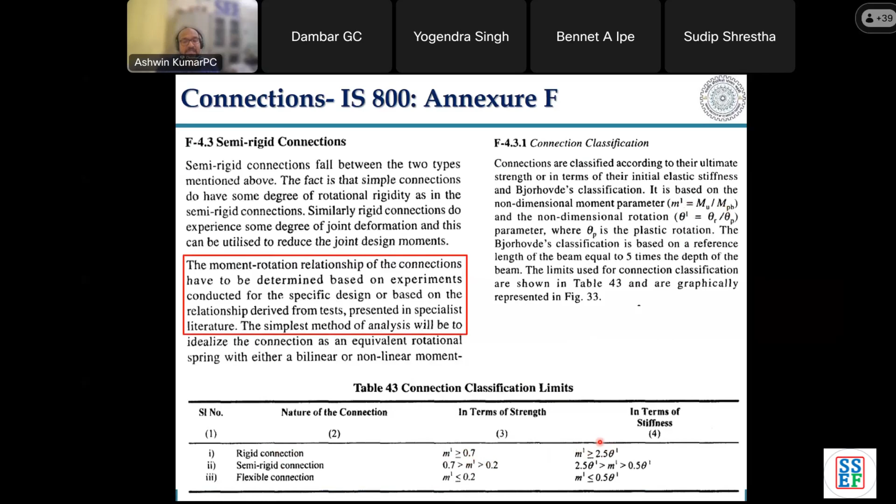So the problem is we don't currently have a procedure to understand, with our grade of steel and connection arrangement, or if we borrow the arrangement from AISC 358, whether we end up with a rigid, semi-rigid, or flexible connection. Do we have the correct electrode? We follow the AWS code, American Welding Society codes, even for our welding procedure, so whether we end up with a pre-qualified connection or not is also a question mark.

So there is a lot to address. The task is huge for everyone in this country to research steel and bring up more reliable connections with respect to these kinds of steel connections. So a lot can be done in this particular category.

Now these are all the available connections. Many practitioners might be using these in your PEB structures or steel structures. Understand that this is an I-to-I connection, and these pre-qualified connections are only for the major axis, where the beam applies moment about the major axis of the column. None exist for the other case.

There is none for the minor axis. So you cannot consider it a rigid connection if the beam is connecting to the minor axis or attaching to the web of the column.

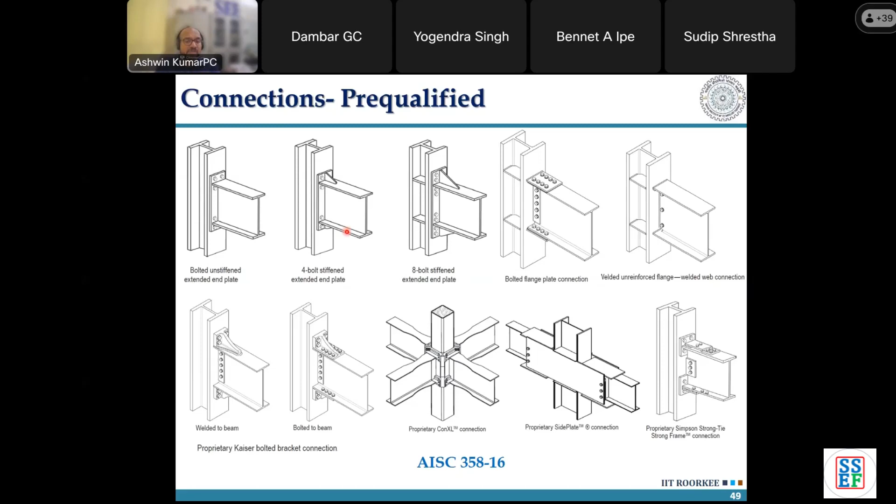Please don't consider this as a rigid connection when you go about your design and drift calculations, etc.

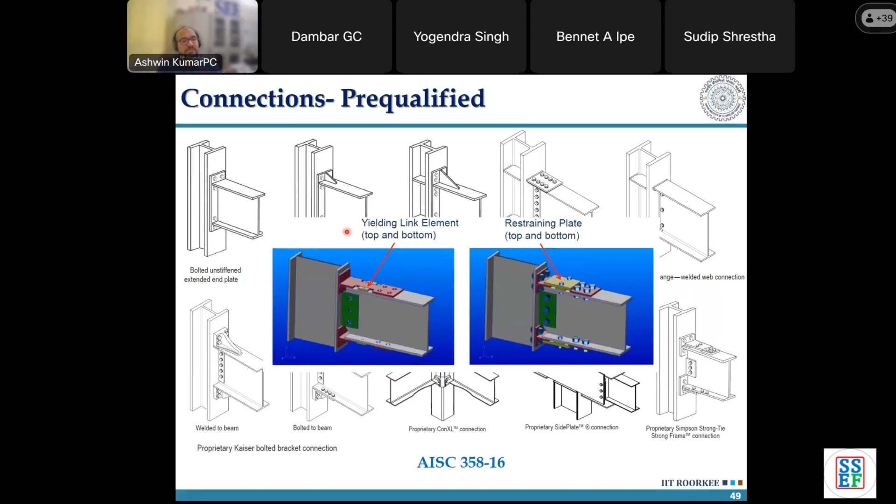These are all the connections that are there, and procedures are also available. What we can do is look at the procedure in which they have pre-qualified a connection and adopt the same to develop some connections for Indian practice.

With respect to some studies we have done on grades of steel, base metal and so on, I want to highlight a small study one of my MTech students did, where we considered two frames: one in which only peripheral moment frames are there.

And one in which the redundancy is higher, as in Indian conditions, where we use all frames to be moment resisting frames. This has been analyzed only in the X direction, because if I go to the Y direction, there is no moment frame there at all.

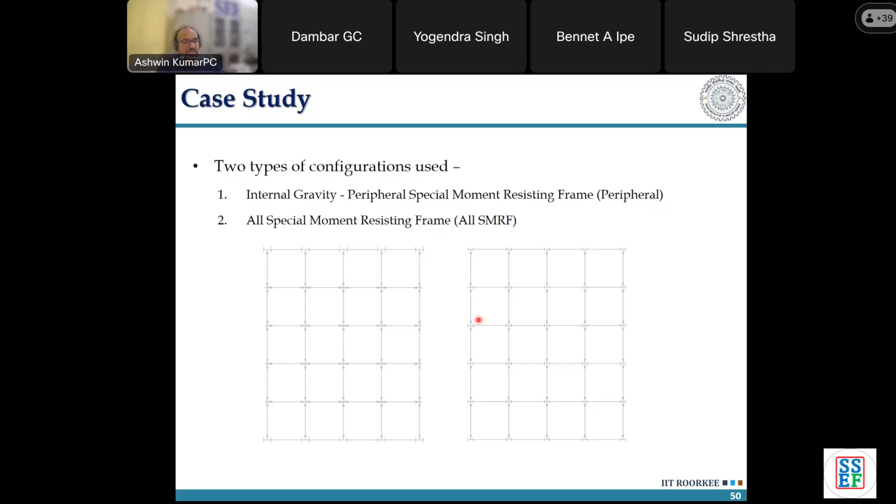Then I have to go for another lateral force resisting system to do the actual design. We took different categories of 3-story, 6-story, 9-story buildings with bay widths varying from 6 meters to 12 meters, and looked at different aspects such as the grade of steel.

If I use, let's say, RY value of 1.5 in one case, and say I use an E250 grade, the average value of RY for E250 is 1.4. If you ask the manufacturer about different RY values, you may get a different kind of variation - you might get 1.6, you might get 1.2. It may vary because 1.4 is just a mean value. So what if this RY value is taken as 1.5, what happens?

To understand the performance clearly, we modeled the non-linearity, similar to what has already been done for RCC, to give you a flavor of performance-based design. I think Tajul would have given you an explanation with respect to 41-17, etc. So whatever is given for non-linear hinges in 41-17 for RCC, the same is given for steel also - for beam, connection, panel zone and column.

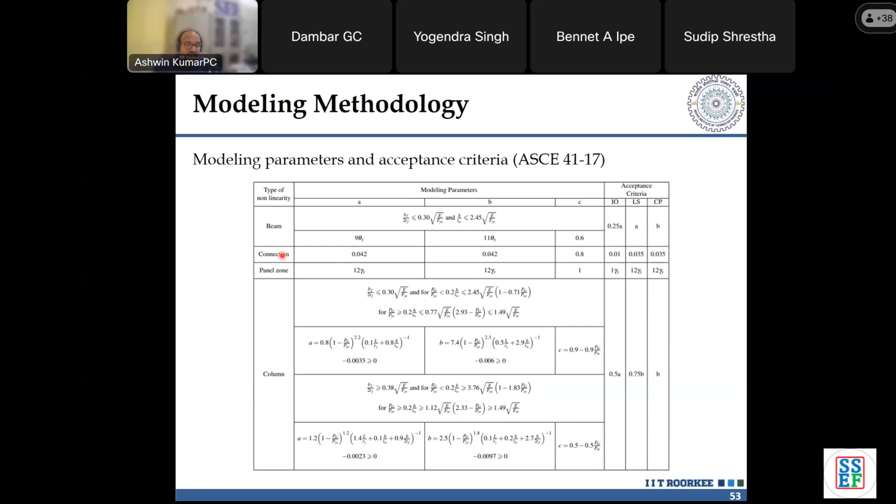So whatever type of connection you choose, there are different rotation values given for different types of connections. You can check them and give your model accordingly. Why I'm saying this is, we have 4 elements: beam, column, connection and panel zone.

If I model the non-linearity in these elements - let's say I'm depending upon the non-linearity of the panel zone - then I have to think about the deformation due to the lower stiffness of the panel zone, and the secondary effect that the panel zone might have on the overall behavior of the system.

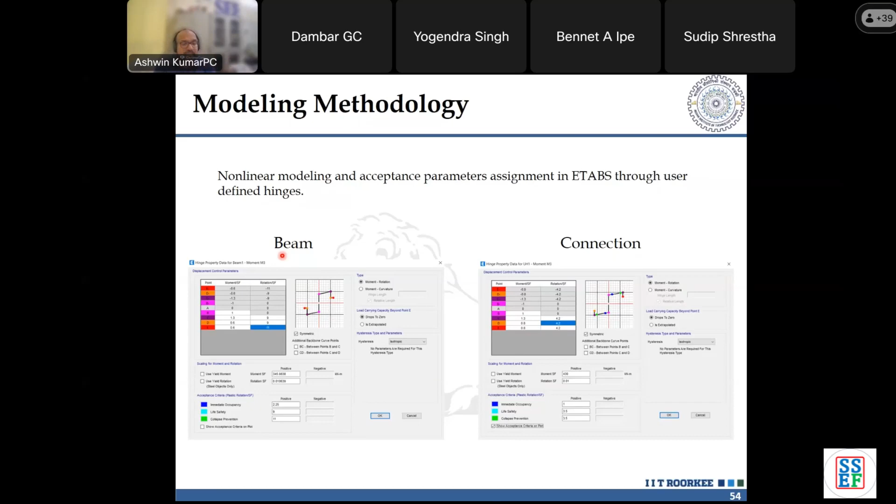When I do the analysis, I cannot depend upon the non-linearity of the panel zone but not model the panel zone in my beam moment frame design, because then there will be a problem in terms of the reality versus what you are modeling.

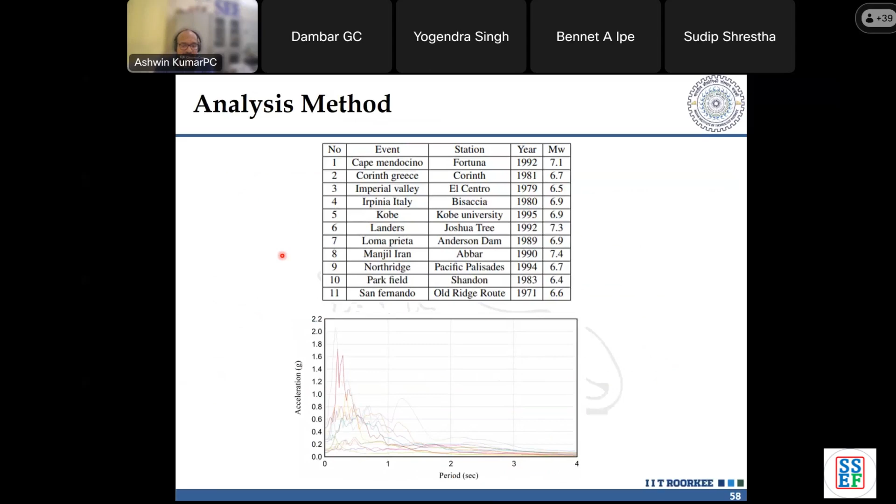So if you model beam, column, connection, and panel zone nonlinear properties as given in 41-17, and then do an analysis - we had done a time history analysis - you can look at column hinge, beam hinge, connection hinge, and panel zone measurements, and understand the problem when doing a pushover analysis.

We did pushover analysis since this is a low-rise structure, where the fundamental lateral mode is the governing one. That is why we went for pushover analysis.

Based on that, we observed the first phenomenon that happens is panel zone yielding. The next one is column connection hinge getting formed. The performance point occurs, and then only beam hinge is formed - which is not the ideal behavior you would want. You would want the beam hinge to form first, then panel zone yielding can happen. Column hinging should not have happened.

So somehow, using our demand, our seismic criteria, our loading criteria, our steel, and some kind of information, because we don't even have a 41-17-equivalent criteria for this. If we take that particular criteria - there are some plus and minuses here and there with respect to our code and understanding of steel - it would take a large number of people coming together to develop this particular criteria.

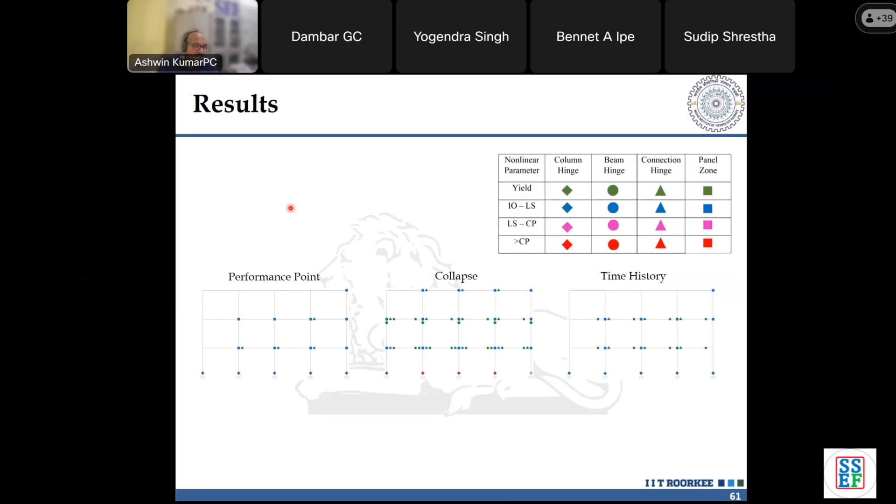So when we did this analysis, we found that across all models and all depths, this is the same phenomena. We are getting connection hinging, panel zone hinging, but no beam hinging was getting formed.

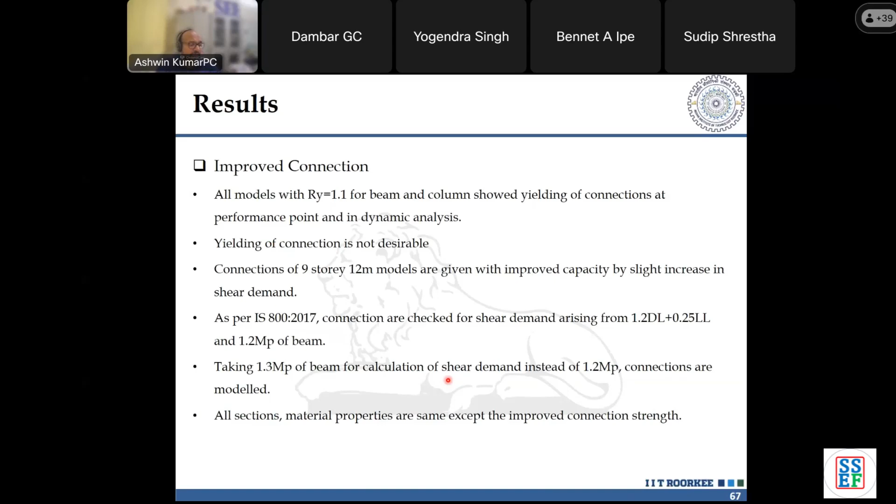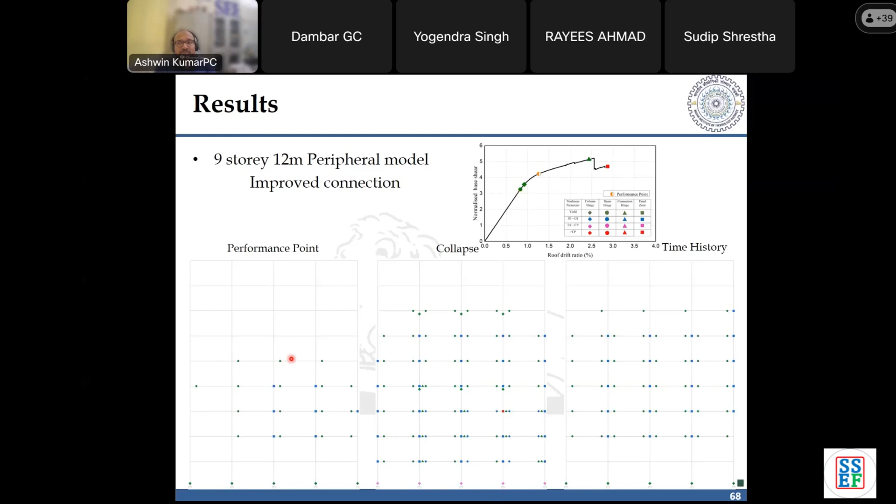But when I altered the improved connection, or changed the design, taking 1.3 Mp for calculation of shear demand instead of increasing demand on the panel zone compared to the beam, the code says use 1.2 Mp to calculate shear demand in the panel zone. Rather than that, if I use 1.3 Mp, suddenly my behavior changes. I get beam hinging to be the first criteria that forms, and then it moves on to panel zone hinging.

So that is what I want to say: first of all, do the design correctly, using the correct sections, using the latest code, using correct material, and all the design procedure has to be done. Then if you're doing performance based design, we don't have a criteria right now in terms of moment rotation.

Take ASCE 41-17 itself. Why I'm saying so is because if you open 41-17, it gives you a backbone curve, a monotonic backbone curve. Now you would ask me, in earthquake it is only the cyclic behavior that is predominant, so how come a monotonic curve is given? The 41-17 curve is actually a derivation which is given as a monotonic curve, inclusive of the effect of cyclic behavior that is coming into picture.

So how does a code give its clauses? Whatever may be the actual capacity of the section, the clauses would keep you in a safe range to accommodate certain uncertainty. In the same way, the monotonic curve given in 41-17 already includes the cyclic effect into picture. So it is a bit conservative.

If you test a beam section or a column section, whatever rotation your beam or column might have will be more than what 41-17 has. So till the time we know better about our material, it is okay to use 41-17 for the time being in order to do your performance based design, vulnerability analysis, or nonlinear time history analysis.

Right? With that, I think fun questions. If it had been interactive, or if you were physically there, we would have talked about it.

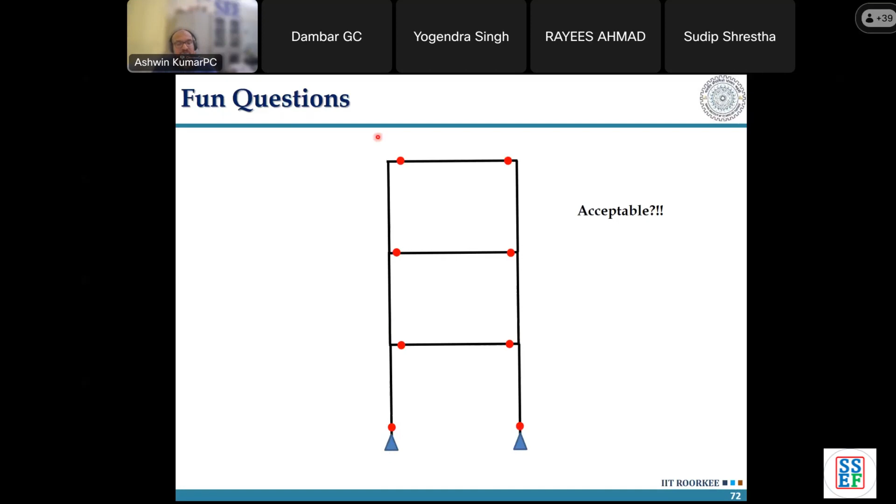And the last one, with respect to this, is it acceptable? It is acceptable, but here there is a throw, that a flexural hinge or such kind of hinge, the support is pinned here. So you would not expect a hinge to form at that particular location. Just to have fun with you guys, I kept that particular slide there.

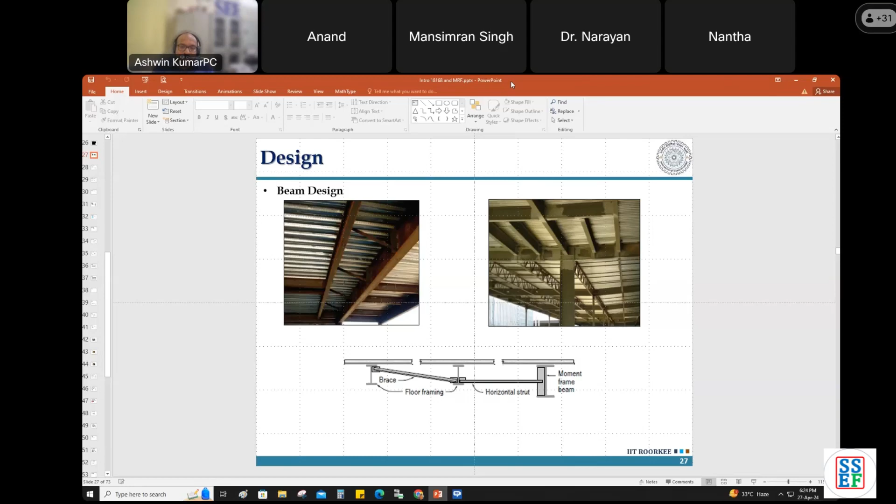Okay, now there are two sub questions. In normal practice, either we go with plan bracing, or if it is an RCC deck slab, usually we don't provide anything - it's just a deck slab with shear studs. Especially near the column, if there is tension at the top, that restraint will not be useful. So secondary beams running in the other direction, if available, are fine. But if they're not available, then we should provide bracing, because it is the requirement of the beam in terms of lateral torsional buckling.

One more thing - in some of the literature I've seen, a vertical stiffener plate is also sometimes considered as giving lateral restraint. If that is available, even gusset plates provided between beam-column joints also provide restraint and give additional rigidity to the beam-column joint. So anything we add has some kind of effect overall on the load transfer or division.

So the best case scenario is we have a current code that we have to follow, but yes, more research has to be done in order to understand the effect of different plates - whether stiffener or gusset plate, accordingly.

Now there are further sub questions. In one of the slides you mentioned local buckling and global buckling - for local buckling, the stiffener may be useful, but from a global buckling point of view, how do we address that? For global buckling, lateral bracing is the better option.

For example, if a column has a 12 meter height, you provide lateral bracing at mid-level, even if there is no slab there. Normally when you design an industrial structure, you break the height of the column by giving horizontal bracing to reduce the effective height. The same applies to a beam - if the length is increasing, providing lateral bracing is what controls global buckling. As you said, stiffeners might not help with that.